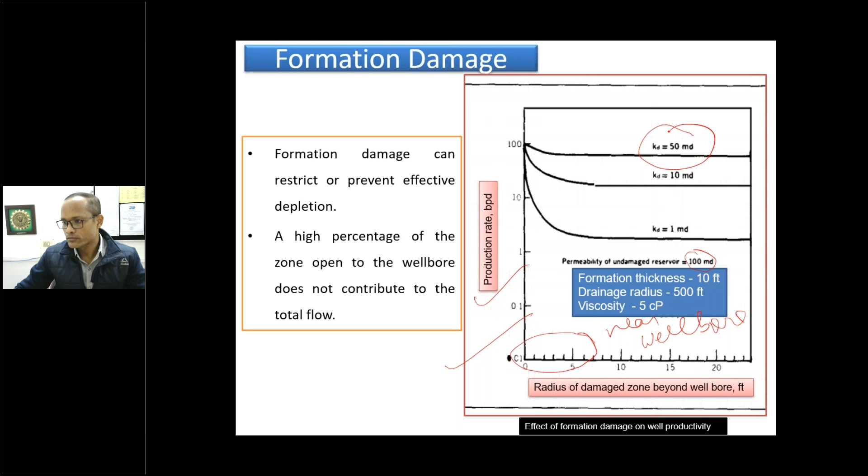Because of this damage zone, the damage permeability - though the formation permeability may be very high - is reduced near the wellbore region because there is damage there, and this damage reduces the permeability. What is permeability? It's the ease of flow, the connectivity between the pores. If you have n number of pores in the formation and these pores are connected, the fluid will flow easily across these pores. If these pores are blocked because of solid invasion or other particle invasion, the connectivity between these pores will be less, so permeability will be less, and that's how production decreases.

In this case, the damage permeability is decreasing. No matter how good the permeability is deep inside the formation, ultimately the fluid has to come up to the well. So if this area is not very clean, you will have a significant reduction in production. That's what formation damage is - it restricts and prevents effective depletion, and blocks the flow of hydrocarbons. Because of that, high reserves may still remain inside the reservoir, even with very good pressure energy inside it. So a high percentage of the zone is not contributing to the total flow, and that's why we are losing flow inside the formation. There are various mechanisms which can lead to formation damage.

Clay swelling is the main and better understood mechanism. Once your well is drilled, you have drilling fluid inside the borehole. You develop a differential pressure in the overbalance condition, mainly with water-based drilling fluid. Because of filtrate invasion, or formation of filter cake, or invasion of mud particles, the near wellbore region gets damaged. If you have swelling clays like montmorillonite or the smectite group, they will swell, reducing the effective permeability.

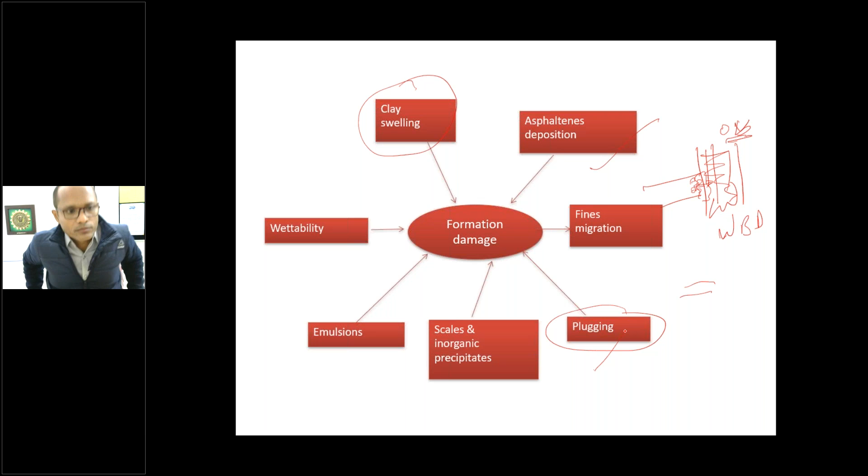Then emulsions - because you're using various additives including surfactants in the drilling fluid, constituting this particular fluid. Because of filtrate invasion and these factors, you may have formation of emulsions or emulsion blocks near the wellbore region or inside the formation.

There's also change in wettability. Since there is filtrate invasion, and during well stimulation jobs you're using acid and pumping various additives along with the acid and solvents, there may be wettability alteration. This wettability change can again lead to formation damage, due to the invasion of other fluids.

Then there is the concept of relative permeability. All these things in detail contribute to formation damage. This is how it's better understood in reservoir engineering - how wettability and these other factors contribute to all these damage mechanisms.

In overbalance condition, we keep the pressure just more than the reservoir pressure, to maintain primary well control and other factors. In that case, once this filtrate is formed, since it's a permeable media, there will be filtrate invasion.

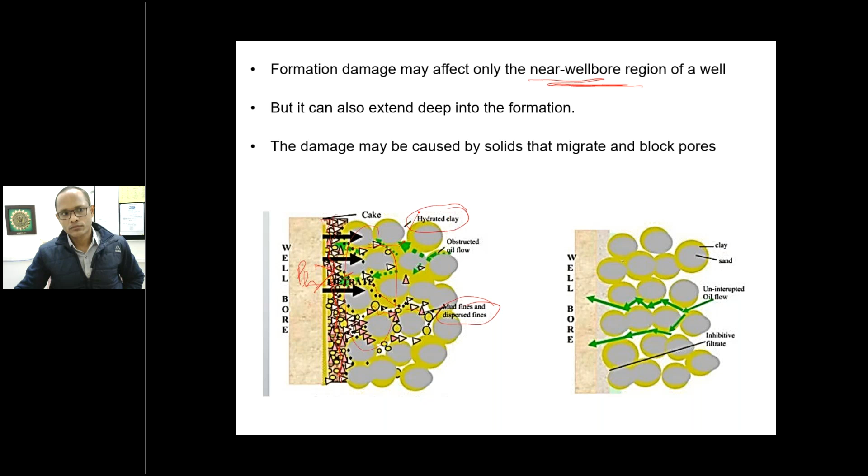You can use simply inhibitive mud, or you can use a particular additive which can give you an external filter cake, or which can give you very less filtrate invasion or less fluid loss. In that case, these pores and all these things will not be blocked. You will have better connectivity, and that's how this particular zone will not have that much significant damage.

Now, damage due to drilling that we have discussed - the blockage of pores, fractures, filtrate invasion, and clay swelling by filtrate. So you can see it has a filter cake, and the cross section of wellbore.

So once it goes inside a highly fractured zone or a zone with high permeability, it can go deep inside the formation, and that's how it will contribute to the plugging of pores. Once the pores are plugged, we lose the connectivity between the pores, and that's how the permeability will again go down.

Now again you can see why are we worried about this damage near the wellbore. See the simple pressure profile here. The static reservoir pressure is not depleting tremendously like this in the beginning. So once it is coming near the wellbore region, because of the skin present, or because of the additional restriction near that region, there is a tremendous drop in pressure because of this skin.

So what is skin? In our reservoir engineering, we define this skin as a numerical value which can give you some idea about the damage inside the formation. So S greater than 0, you have damage. S less than 0, well is improved. S equal to 0, no damage.

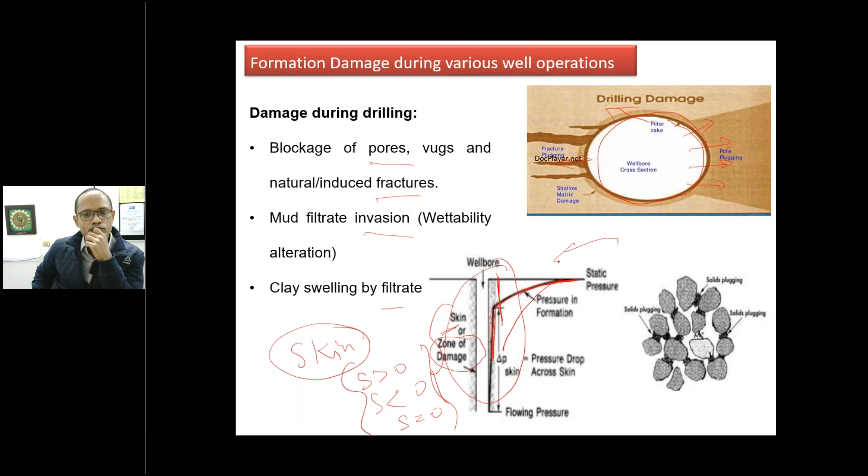Now, there may be damage during casing and cementing also. There may be some filtrate loss from the cement also. There may be plugging by cement and mud solids also while circulating the particular flow.

There may be damage during completion also. Once we are perforating, what we are doing is simply perforating the particular casing and then the cement sheath. So once the perforations are being made, there is a huge amount of debris which is being created, and again if the well is not flowed back very efficiently, this debris or the fines which are being generated may again block the perforations.

Perforation, nothing but holes in the metal. See, once we complete a well, we put a casing - a metal casing. So suppose 9 5/8 production casing we are putting, and we have to cement it. Then once you are done with this drilling, you have to simply produce it. Then for production, you have to put holes - you have to establish pay zone connection with the wellbore.

So to establish this pay zone connection with the wellbore, you have a perforating gun which will be having detonating cord, which will be having charge debris, shape charge, and all these things. That's how once you detonate, it will go and penetrate inside the formation. Then that's how these holes will be created, and finally you will get the connectivity established.

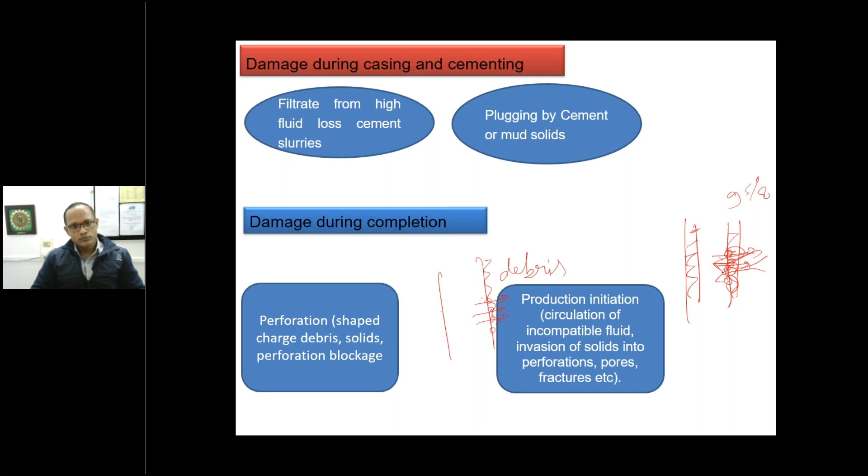So now during production initiation also, you are circulating fluid, and again from this fluid there may be invasion of solids and polymers into the pores and fractures, and that may again contribute to formation damage.

There is damage during the well stimulation job itself also. Though the well stimulation job is targeted towards removing the particular damage, or increasing pore connectivity, or increasing permeability depending upon the formation type and the job desired for a particular well, during that job itself there is also a high chance you may damage the well. For example, you may be doing a fracturing job, or an acidization job.

Since in acidization a huge amount of rock and acid reaction is taking place, you may have a very good amount of fines and debris inside the formations. Once you try to flow back, the additional zone which you have cleared, or the fracture which you have created, may again get plugged by the debris or by the migration of fines. So during well stimulation itself also you may have formation damage.

Then once you are cleaning a well or circulating a fluid, filtrate invasion may take place. If some reactive clays or clay minerals are there, they may again get swelled, and because of this swelling also you may have formation damage.

Then you use proppant to fracture the particular formation, and to keep that fracture open you are using proppants. Again, improper placement of proppant or the migration of fines will lead to reduction in permeability or plugging of the fracture. So in all these situations you may get formation damage from improper well stimulation jobs, or during the well stimulation technique itself.

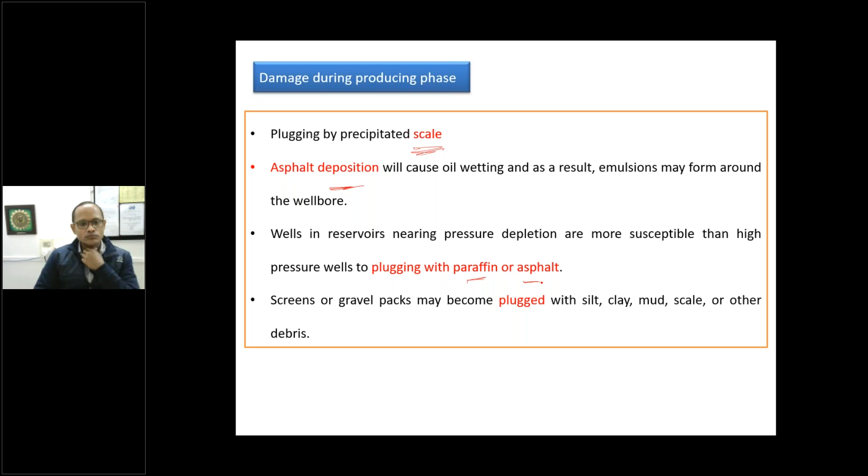Again, during production you have screens or gravel packs which are installed. Gravel packs, why do we use these? Few formations don't have much cementation strength, so these sand grains, when they are not tightly held up or tightly bound, are unconsolidated.

So once you start taking production, because of the drag forces and pressure disturbances, or because of changes in mineralogy and other things, this loosely bound sand will try to get into the wellbore and come up with it. This sand is not desired at all, because it will erode your equipment.

So just to prevent this, we use sand control technique. Gravel packing is one such technique where you use coarser grains sitting near the particular zone, which allow the flow of hydrocarbon but not the flow of sand and smaller grains. Initially they have very high permeability, but slowly, as production takes place and there is movement of silt, clay, mud, or scale, they may again get plugged, and you have to look for some removal technique.

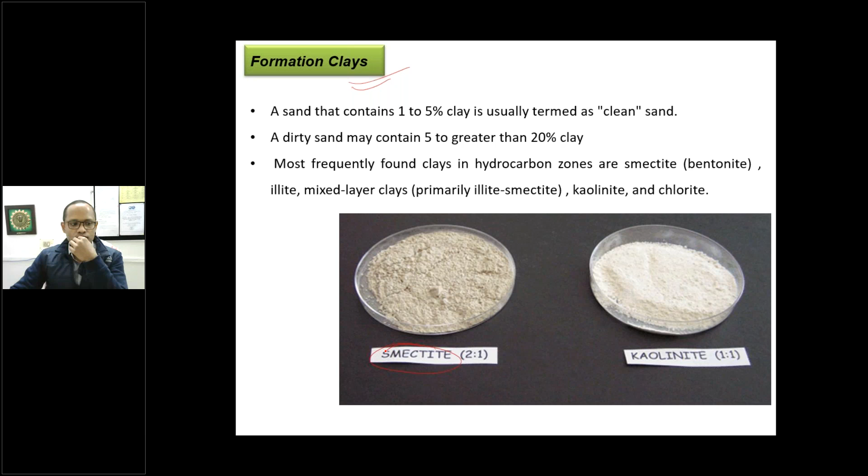Now, these clays are very troublesome, because the reactive clay, mainly smectite, the moment it interacts with water... and what is the source of water for us? The drilling fluid that we are using, or the completion fluid, or during workover, the workover fluid. So if you are using water-based fluids, rock-fluid interaction may take place, and because of this, when this clay comes in contact with water, it may swell. When the swelling takes place, that will significantly contribute to formation damage.

Not all types of clays are problematic for us. The clays having swelling potential, with high cation exchange capacity, can exchange ions present in the water or fluid, leading to migration, swelling, and disintegration. A sand containing 1 to 5% clay is not a problem - generally known as clean sand. A dirty sand or sandstone having clay percent around 20%, or in between 5 to 20%, may have some clay minerals which may create a problem for us, leading to formation damage. So as I said, all clays are not a problem for us.

So just by simply seeing the clay percentage, that okay, clay is 20 or 25%, it will create a problem once we use water-based drilling fluid, or once we have rock fluid interaction - this is not the right statement to say, because unless you identify in this 20% what are the clay minerals, the types of clay minerals, then you can say if this particular clay mineral is there, or other clay mineral which has high magnitude rock fluid interaction, then it may create a problem during drilling or during this particular well operation.

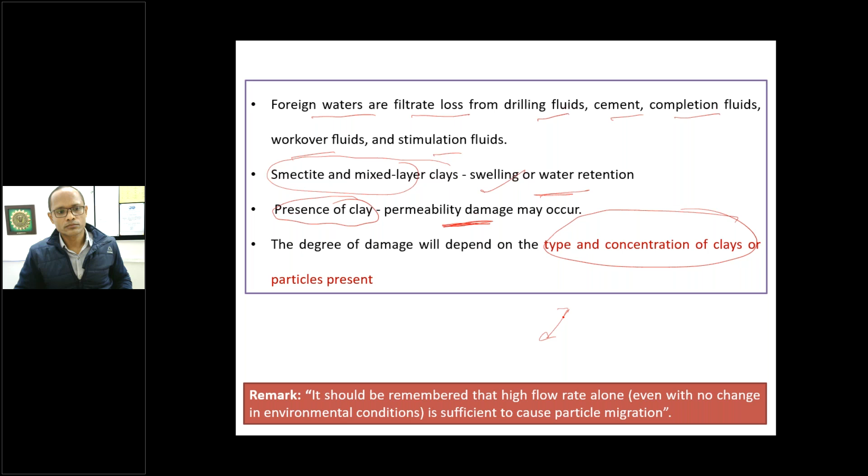I read somewhere that during production itself, when there is no interaction between the rock and fluid, or no particular damage done during production, when you have very high flow rate alone with no change in environment condition, this will cause particle migration. So when this particle migration is taking place, they may go to a particular high permeability zone, or start getting accumulated there, and that's how they lead to a reduction of pore connectivity.

Now, these damage types have been categorized into mechanical, chemical, thermal, and biological. Depending upon the operation, suppose we are injecting fluid from the surface or doing some injection job, that fluid may have some bacteria or something like this. This bacteria may go inside the formation, and that's how it may lead to absorption or precipitation, or something of this sort. Then that may cause biological damage.

In thermal damage, when we are doing steam injection jobs, or in-situ combustion jobs, at high temperature there may be mineral transformation taking place, and there may be generation of gases like hydrogen sulfide and others. These gases may create trouble for us and lead to formation damage.

In chemical damage, there will be interaction between rock and fluid, and because of clay swelling and similar effects, you will have formation damage. In mechanical damage, the migration of fines and similar issues, or simply when you have an open hole and you're using a drill bit or tool which is directly creating trouble or interacting with the particular sensitive pay zone, that may again cause mechanical damage.

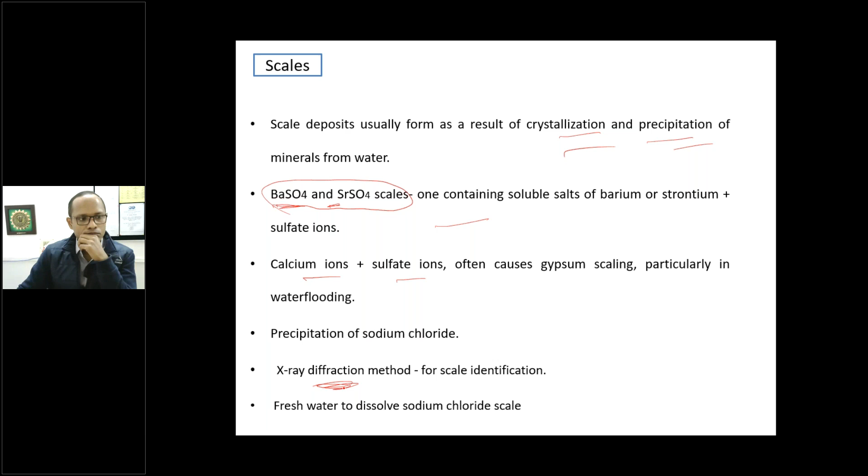Now we can identify scales using XRD. This technique lets you identify the scale by getting characteristic peaks. If you have some kind of scale, you can utilize different solvents, say water, or acid salts, to dissolve it. So this is just a summary.

If you have sodium chloride, you can use a water soluble scale treatment. If you have calcium carbonate or iron carbonate scales, you can use acids to dissolve these. Some scales are neither water soluble nor acid soluble, so you have to use intermediate compounds, or you can use commercially available solvents or additives from service companies. They will form an intermediate component, which will then be dissolved with acids.

Once these scales are inside the formation, blocking the pores or reducing pore connectivity, you have to dissolve the scale depending upon its type. You can use water to dissolve a water soluble scale, and acid to dissolve an acid soluble scale.

Now, how do we identify or diagnose the damage? Using well test analysis or pressure transient analysis, you get various plots. Utilizing that, you can get the value of skin factor S, and check whether S is negative, positive, or zero. In that way, you can check whether the skin factor suggests going for a well stimulation job.

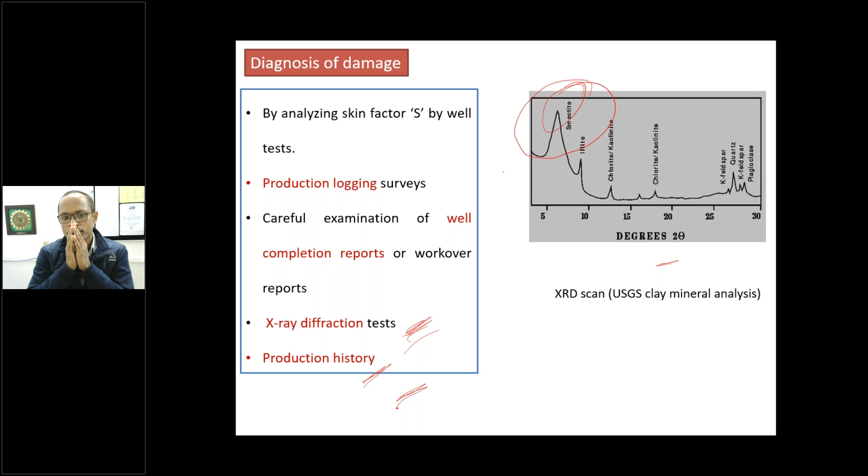And in that case also, some damage has been done, and accordingly you can plan for a well stimulation job. Now coming to stimulation, generally production happens naturally because of the compressibility of fluids, their mobility, and connectivity between the pores.

We call that ease to flow, which is connectivity between the pores, i.e., the permeability. If the formation has low permeability, or is damaged, it will not contribute to the desired or economic flow rate, and you have to choose a well stimulation technique. It is not always the case that there is damage requiring stimulation. There are formations which have inherent very low permeability, like shale.

In case of shale gas, they have very low permeability, sometimes in nano darcy, sometimes as low as 0.1 millidarcy. In that case, even though you have not done any damage during surface operations or various other operations discussed previously, you still intend to fracture that zone, or try to establish or increase the permeability and connectivity in the pores, because that formation may not give you the desired economic production rate. So we try to stimulate even non-damaged formations which have very low permeability or pore connectivity.

So we can say stimulation jobs are targeted towards improving pore connectivity, mainly in low permeability rocks or reservoirs, and they can also help in removing damage that has been done. Simultaneously, they can increase the permeability inside the formation for low permeability rocks, and they can also increase the effective wellbore radius.

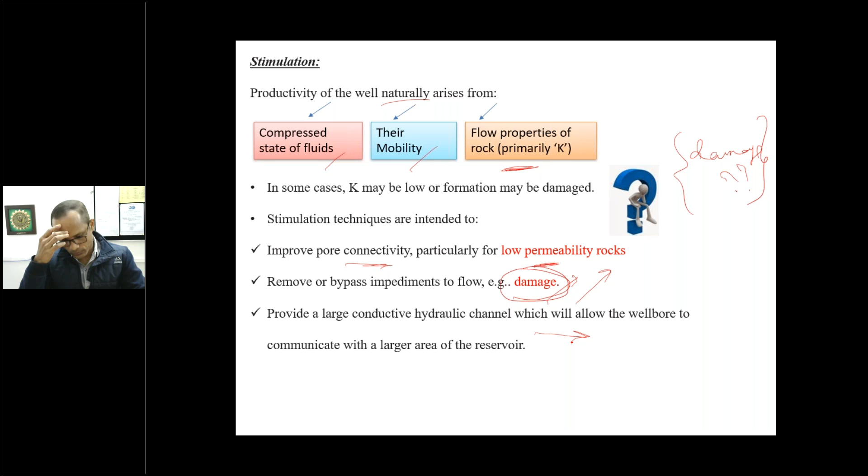You can have better connectivity between the wellbore and the formation by having more hydraulic fracturing or the hydraulic channel. That's how to establish better connectivity. Now the stimulation techniques are categorized.

We have acidizing. Depending upon the flow rate and pressure, you can have matrix acidizing as well as fracture acidizing. It depends on what kind of pressure you are using. If you intend to fracture or break a particular formation, you have to inject at a flow rate or pressure more than the fracture pressure.

Suppose for a particular formation the fracture pressure is 4500 psi, then you have to inject the fluid from the surface such that the pressure is more than this value. That's how the formation will break down. Once you break down the formation, the particular fluid—whether acid or proppant or whatever you are planning to put inside the fracture—that job is done.

Normally in matrix acidizing, we are not intending to fracture the formation. We simply try to inject below the fracture pressure, so placement of acid happens inside the formation or the zone you are targeting. Since the injection pressure or rate is different, the objective is different. In matrix acidizing, we are looking to remove near wellbore damage or skin damage, or to change the permeability or connectivity near the wellbore, maybe a few feet from the wellbore.

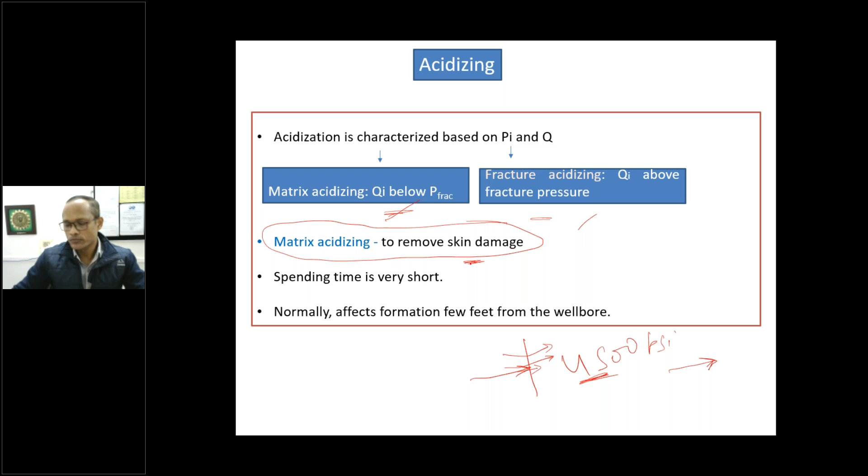Since the reaction is involved between the rock and acid, depending on the acid strength or reaction rate, the spending time may be very short. Even within 1 or 2 feet, the acid may be completely spent, so the near wellbore region affected may be only a few feet. That's why acids have high reaction rates, and you can use retarders or additives to increase the spending time so the acid can go deeper inside the formation. That's how the acidizing job is targeted toward a few feet from the wellbore.

In fracture acidizing, like in hydraulic fracturing, we are simply fracturing the formation and going deep inside it. The objective is to create linear flow channels inside the formation. So this fracture acidizing is an alternative to hydraulic fracturing and propping.

In carbonate reservoirs, once we fracture a particular formation, we will have acid there. This acid will go inside the created fracture, and since there is heterogeneity in the carbonate formation, some etching will occur. So etched, non-uniform fractures will be created, and once you release the overburden pressure, they will not close completely, so fluid can flow easily through these created fractures.

In hydraulic fracturing, we have to put proppant. Here, once the overburden pressure is applied, these fractures will not be closed completely, and that's how you will have the fracture conductivity established.

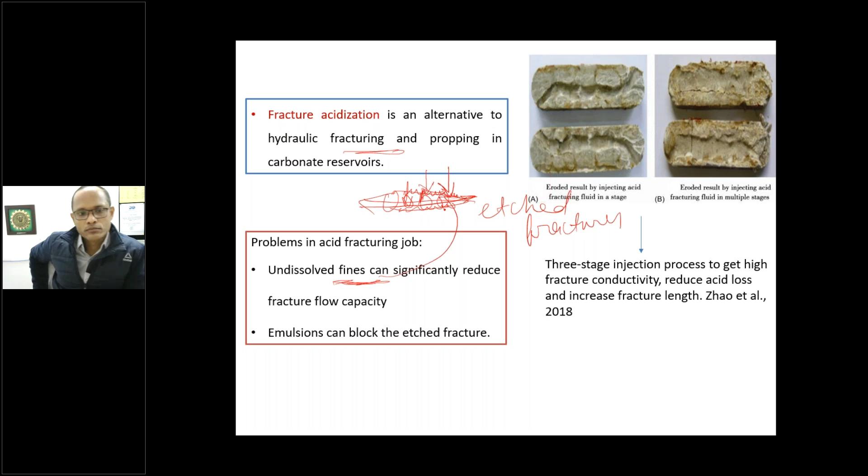Now the problems in the fracturing job: you have a huge amount of undissolved fines. This fines migration may take place, and they will settle inside the created fractures, causing plugging again. We are also using some additives, so there may be chances of emulsion formation with the formation fluid and other things, causing some blockage inside the formation.

Now this is one image showing multiple stages of injection. We will have better fracture length or reduced acid loss inside the formation. So this is one step, and this is three-stage injection. They have given images of four samples, and suggested that in these cases there is more dissolution, so better connectivity is established in these multiple stages.

Now various types of acids that we can use: HCl, HF, acetic acid. Depending upon their acid strength and ionization power, these acids are categorized. For HCl, they generally target the carbonates - they will dissolve carbonates, chalk, dolomite.

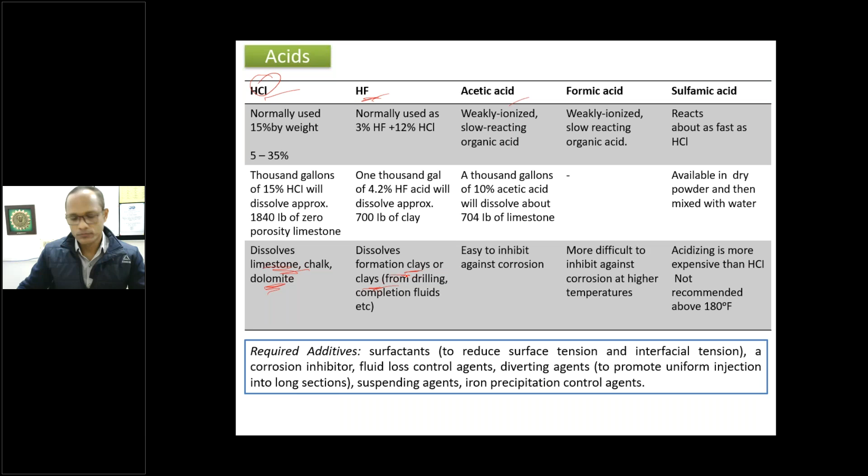HF will generally target the clays - natural clays, or clay additives which have been injected from the wellbore, maybe in drilling fluid. So it can dissolve that particular thing and remove the damage. Acetic acid is easy to inhibit against corrosion. Sulfamic acid is available in powder form, so you can simply transport and bring it to the rig site, dissolve it in water, and then inject it. But it is more expensive than HCl, and it has some temperature limitations also.

In addition to these acids, you require additives also in the acidization job. You can use surfactants to change interfacial tension and surface tension. You have to use corrosion inhibitor because you are injecting from the surface, and the tubulars are in contact with this acid, so you have to inhibit them from being corroded. You also have to use fluid loss control additives, some polymers, so that there will not be significant loss inside the formation. Then you can use diverting agents.

Generally, what happens is the acid will follow the path of least resistance. So a zone with relatively more permeability than the adjacent zone will get most of the acid, and as that zone dissolves, its permeability increases further. So the zones with least permeability will not get a good amount of acid. But we are mainly targeting our low permeability zones, and because of this, the acid is not going to the low permeability zone, or it is not being uniformly injected into the long section.

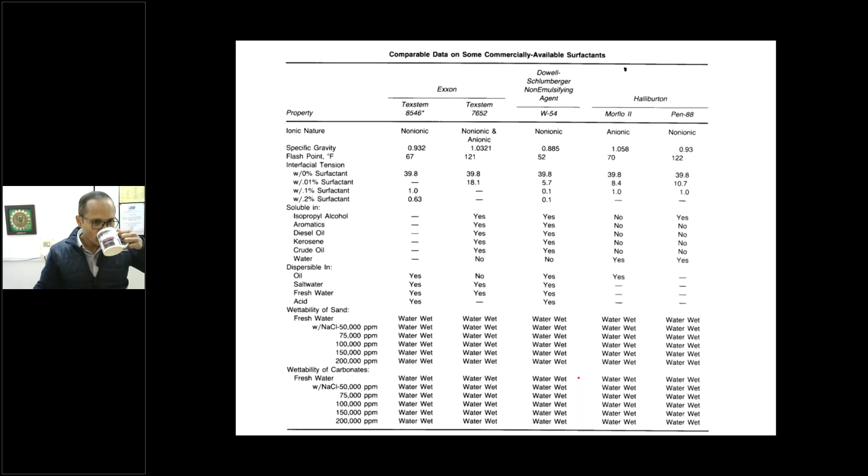You can also use iron precipitation agents and suspending agents just to get the job done efficiently. The various surfactants available under commercial names give certain properties, and based on the particular job, you can choose the particular surfactant - nonionic, anionic, or a combination of nonionic and anionic. This depends on whether they are water wet or oil wet, their solubility, whether they are dispersible in oil, or their salt tolerance, salinity tolerance. All these properties are given, and accordingly one can choose and get the job done.

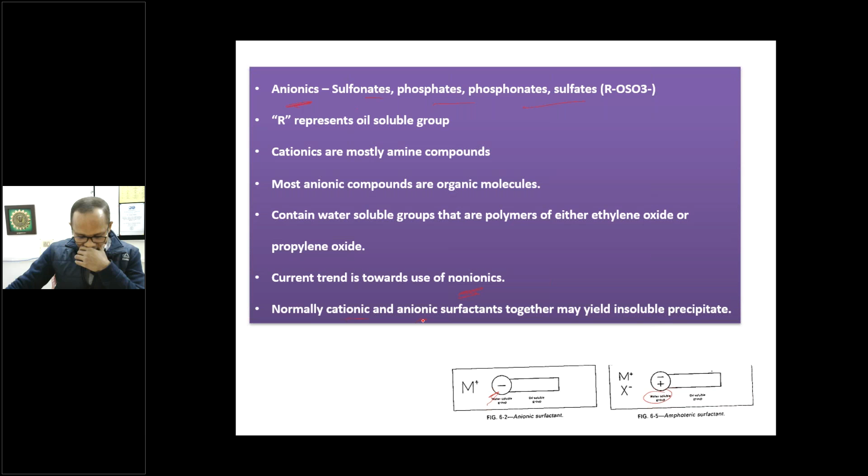Now, once the surfactant has sulfonates, phosphates, and phosphonates, having these, it can be categorized as anionic. Anionic surfactants are a water soluble group. Amphoteric is also water soluble, both negative and positive. Cationics are mostly amine compounds, and these ionic compounds are organic molecules, in contrast to nonionic. Normally cationic and anionic are not used together, because that may yield some insoluble precipitate, which would again be a problem. So depending upon what kind of surfactant you require and the properties needed, you can choose the particular surfactant.

Now, carbonate acidizing. Once we talk about acidizing, we have different formations - in carbonates we have dolomites and limestone, and another formation is sandstone. In carbonate acidizing, the objective is to clear near wellbore damage and also create linear flow channels by fracturing and etching. Here we remove the near wellbore damage, or we intentionally create linear flow channels, establishing connectivity between natural fractures present there, or establishing connectivity between the pores by fracturing - you can have fracturing, or acid fracturing.

Now, the major problem with acid is that it tends to react very fast with carbonate. It will spend near the wellbore, that's why you will not get deeper penetration inside the formation. The problem with homogeneous carbonate is that it will generate smooth fractures. We have overburden pressure - suppose we are fracturing at say 6,000 feet, this overburdening strata will have some overburden pressure on the created fracture. So once you remove the treatment pressure or injection pressure, the created fracture may get closed again because of this overburden pressure.

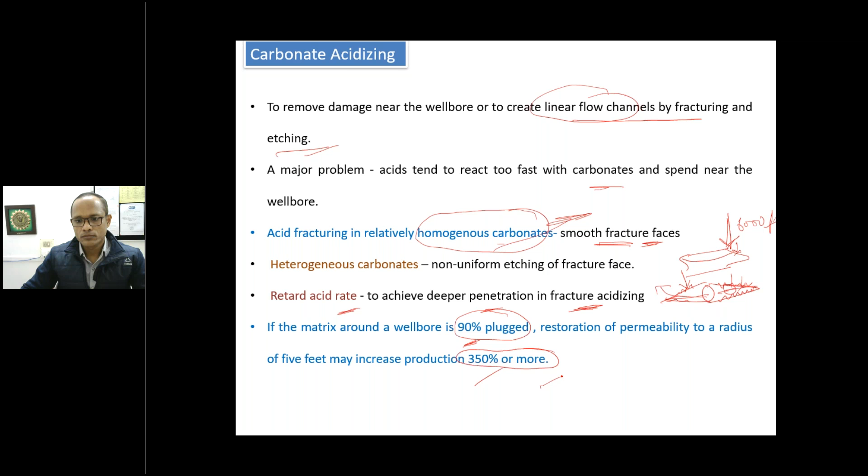So if your wellbore is plugged 90% near the wellbore, and you restore the permeability for say 5 or 6 feet, then you can have an increase in production around 350% or more - that is the significance of removing formation damage. That's how, if we do the job effectively, there is a significant increase in production, provided the formation has better permeability and the damage is near wellbore damage. In that case, by simply removing the formation damage near the wellbore, we may have a good amount of increment or production hike once the damage is removed.

In the case of homogeneous formations, it is very difficult to get a particular non-uniform fracture. So you can have a viscous preflush before the main stage, some viscous gel or viscous polymer gel inside the homogeneous formation. Once the acid arrives, because of this viscous gel being present, acid will be diverted into different portions. So in that case also you can have etching by acid channeling, irregular etching, and you may get this non-uniform fracture.

So in acid fracturing we go above fracture pressure, and here we have conductive wormholes. Because of carbonate having different properties, the pore size or vugs and fractures will not be of uniform size. We may have big pores, small pores, and all these things. So the pore which is having a bigger size, the acid will try to go there, and this particular pore will further grow more and receive more acid. That's how these wormholes are being created in carbonate acidization, or normally acid fracturing in the carbonates.

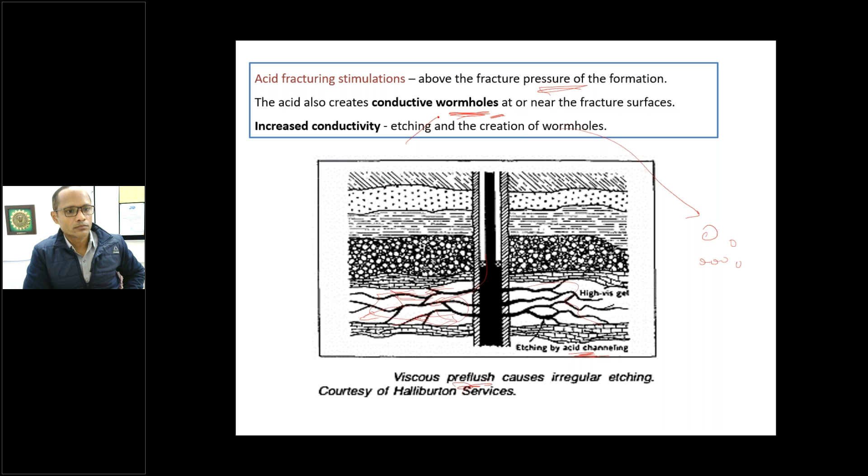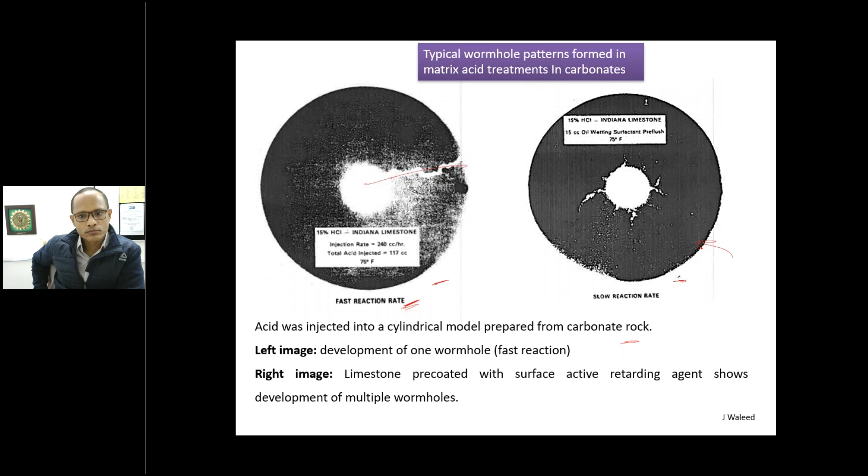This is one core flow study. This is the typical wormhole pattern found in matrix acid treatments in carbonates. Acid was injected into a cylindrical core prepared from the carbonate rock or representative rock. When the reaction rate is very high, very fast, you can have simply one wormhole extending. When you have something which can retard the acid reaction rate, or slow it down, by involving some surface-active retarding agent, you can have multiple wormholes inside the formation. So depending on the flow rates, the generation of wormholes changes. Even though we are using the same type of acid, same concentration, same additives, because of the acid reaction rate and change in mineralogical composition, the job may give different results.

Typically, once we fracture a carbonate rock, once you pump the acid inside the fracture, the acid will etch the fracture faces. What happens then? You will have conductive wormholes, or rough, non-uniform fracture faces, and that's how fracturing is done inside the carbonate.

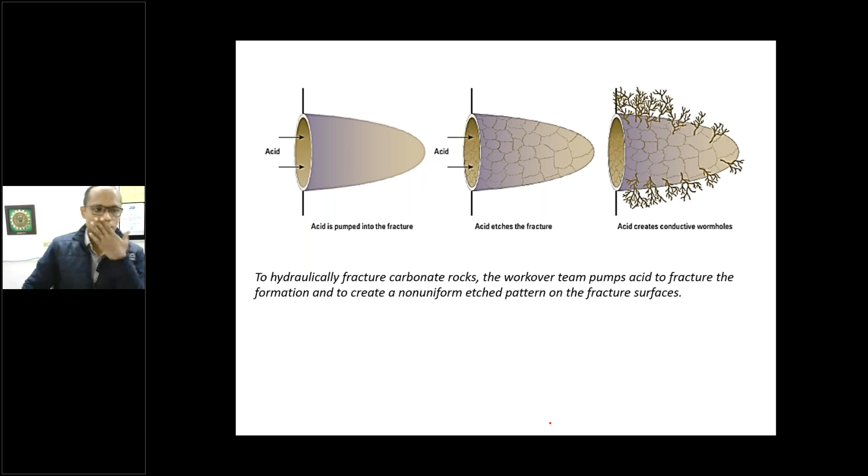Now, acidizing in sandstone. The target is to increase permeability by dissolving clays near the wellbore. These clays can be natural clays which are there inside the formation, or they can be clays injected from the drilling fluid, or solids which have migrated from the drilling fluid inside the formation.

If you have a sandstone with 20% or more carbonate, you can use HCl only. HF acid can target carbonate, calcium carbonate, sand, shale, feldspar, and clay. But with calcium carbonate, hydrofluoric acid will generate an insoluble precipitate, and this insoluble precipitate will again be a problem for us - that is known as calcium fluoride.

Once you have calcium carbonate, it is better to use some pre-flush so that this calcium carbonate can be dissolved. Once you are using 3% HF in the main stage, this will not lead to precipitation of fluoride ions or calcium fluoride. Generally, in typical mud acid, we use 3% HF and 12% HCl in the main stage. Before that, we have a pre-flush stage, and after that, a post-flush stage.

So HF acid may react with limestone, that is calcium carbonate, and it may lead to calcium fluoride, which is an insoluble precipitate. So avoid this. You can use a pre-flush of HCl, because this will dissolve the carbonate and give you CaCl2. That's how it can be done. Or you can simply use NH4Cl as the pre-flush, or after.

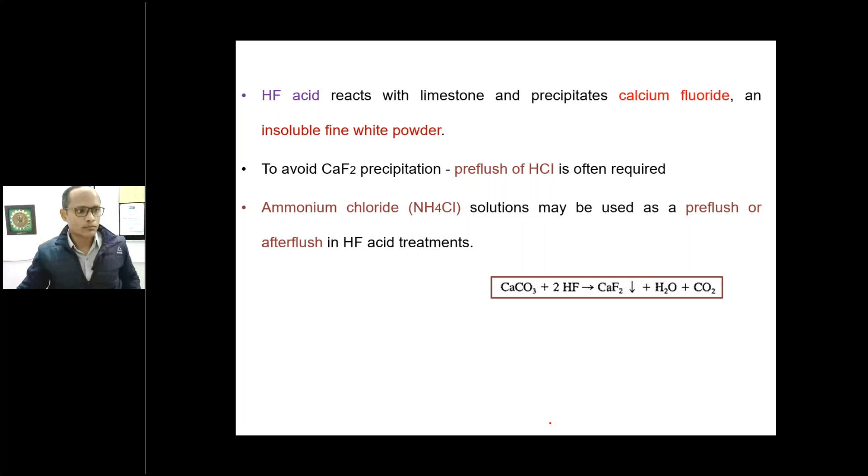In the absence of carbonates, we don't require HCl and all this. You can normally use diesel oil, kerosene, crude oil, or ammonium chloride as pre-flush, at about 5 to 15%. Add additives, surfactant, corrosion inhibitors, mutual solvent. Mutual solvent is used because it will prevent the adsorption of these corrosion inhibitors or surfactants on the rock surface or the sand face, the sand grains.

In an HF-HCl acid treatment job, you can have 3% HF, 12% HCl. After that, you can give after-flush just to displace the spent acid, or just to get the job done efficiently. If some unspent or spent acid is there, or some additives, you can push them deep inside the formation, or you can also prevent the precipitation of ions or the formation of emulsion. All these things you can do with the after-flush, and that's how you can have your main job done.

Normal field procedure: first choose the well which has a positive skin factor. You can utilize pressure transient analysis, well test analysis, build up and draw down - all these techniques you can use to calculate the skin factor. If the skin is positive, or the well is damaged, you choose that particular well and use 5 to 15% HCl pre-flush. This pre-flush is required so that we can avoid the precipitation of some ions, like iron ions, and make the environment suitable for the main stage job.

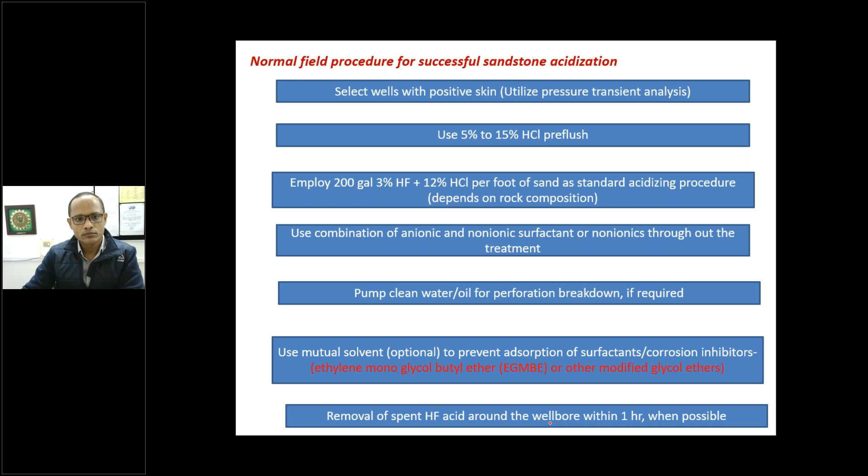Then why are we using mutual solvents? You can use modified glycol ethers, which will prevent the adsorption of surfactants and corrosion inhibitors on the rock surface, so it will not further lead to formation damage. Then, when the acid job has been done, the spent HF acid near the wellbore can be flowed back, and you can have the flow established there whenever possible.

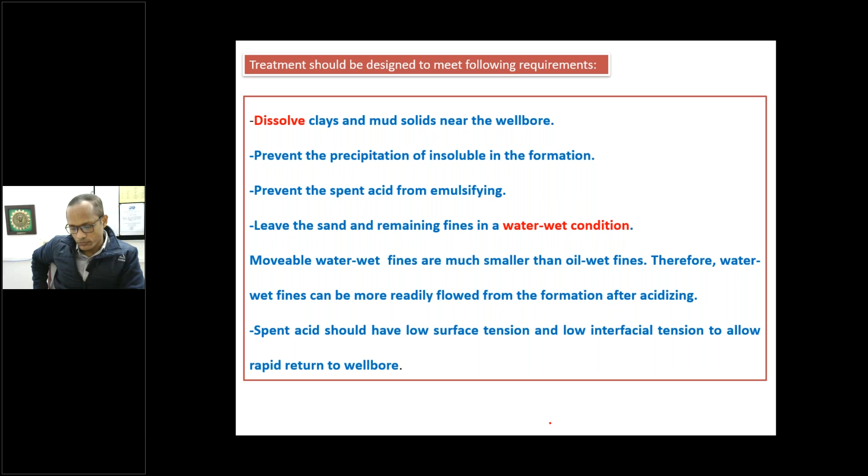Now we can summarize what our treatment job is intended for. It can dissolve clays, mud solids near the wellbore. After the job is done, there should not be precipitation of any insoluble compound, which will further lead to damage, because our intention is to clear the damage. But because of the presence of various ions or the change in concentration of the system, it should not precipitate. So the precipitation of insoluble substances should be prevented, or you can use some additive just to minimize this particular issue.

You can prevent this spent acid from emulsifying. It should not be mixing with the formation fluid and making an emulsion there. So we can use surfactant or additive which can prevent this particular thing from taking place.

Now we will leave the sand or the remaining fines after the job in water wet condition. It is mentioned that these water wet fines are much smaller in size compared to oil wet fines, so they can more readily flow back, or have more mobility, back to the wellbore after acidizing. So later, once we have production or movement of hydrocarbons, this will not cause trouble by blocking the pores and other things. That's why they have said it has to be in water wet condition.

Spent acid should have low surface tension, low interfacial tension, such that when we are trying to flow it back once the job is done, it should return very quickly to the wellbore.

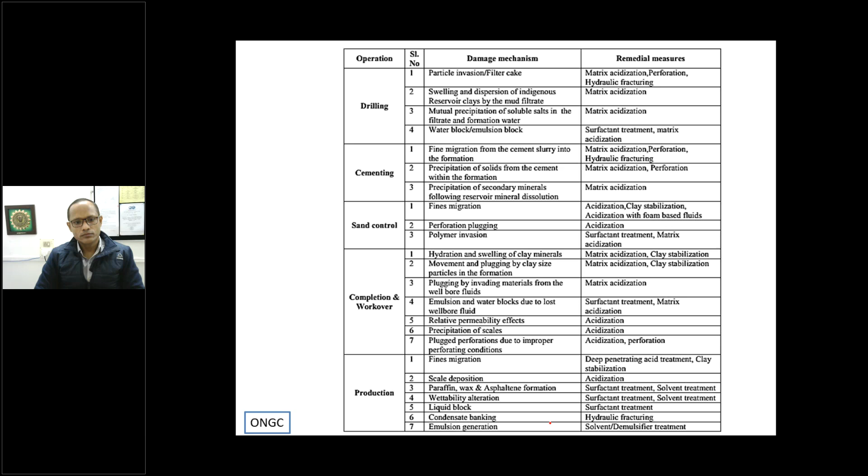Since acid is involved, we must also take care of safety, because the concentration of acids or inhalation may cause respiratory problems in humans - the vapors of the acid and anhydride are very irritating and problematic. If acid accidentally touches the surface or the skin, it may cause severe burns. So special care should be taken while transporting these acids or chemicals, and they should not contaminate your clothes, otherwise it will be a problem. If accidentally contacted, use soap and water immediately so the extent of damage or burn is minimized.

Now, hydraulic fracturing - how it works. It is intended to increase the permeability of a particular formation. A huge amount of water, million barrels, is required, along with some additives and polymers just to have the viscosity - we can use guar gum there. That's how this particular viscous fluid is pumped inside the formation.

There are two stages - the pad stage and the slurry stage. In the pad stage, we simply inject water with some chemicals, additives and polymers, which go inside the formation and fracture or break the rock. In the slurry stage, we inject sand and proppant, which go inside the formation, and once we remove the treatment pressure and the pumps are in certain condition, that fracture will not get closed completely because of the presence of the proppant.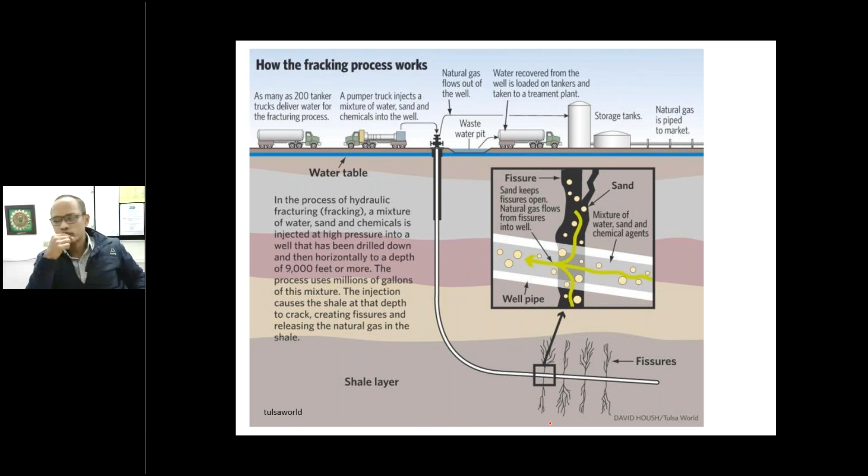So the selection of proppant and the placement of proppant play a crucial role, because they will affect the fracture conductivity. Typically this fracturing profile will be like - you will have a first breakdown pressure where the fracture initiation takes place and the formation is just breaking. After this, you have another stage, fracture propagation, where the propagation of the fracture takes place, and finally you will have an instantaneous shut-in pressure, meaning the pressure required to keep the fracture open. So typically you will have this particular profile once you are going for this hydraulic fracturing job.

Now, the critical part is how to choose a particular fluid. Since we are injecting proppant inside the formation - that may be sand, bauxite or other ceramics - it should have very good transporting property. Viscosity should be good enough. It should have good suspension capability, because the fluid will be going deep inside the formation and will be subjected to various shear rates inside the formation.

Commonly used are sand and bauxite. Sand can be used for all types of reservoirs and is relatively less expensive than bauxite. It should not contain more than 5% fines.

Sintered bauxite is the highest strength proppant. So the designed fluid should have more viscosity, because it has more density as compared to sand.

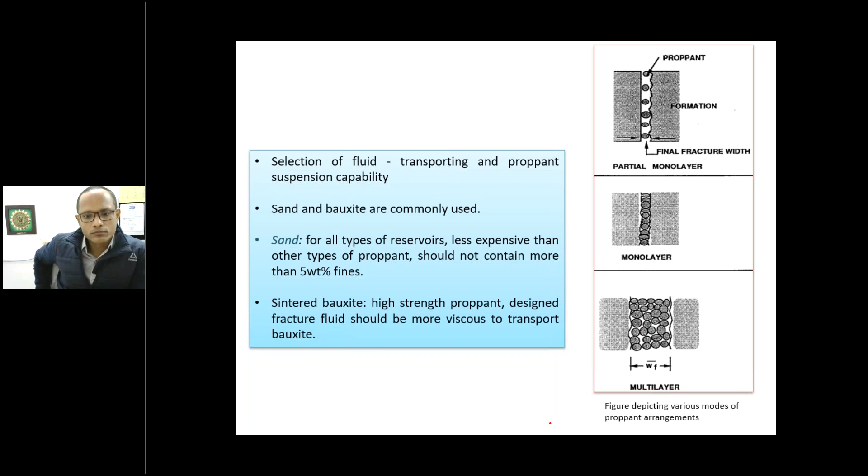Once you remove the treatment pressure, because of the overburden pressure, these proppants help maintain the fracture open. Their compressive strength plays a significant role, because once the treatment pressure is released, the proppant should not get crushed. Otherwise it will cause low fracture conductivity, and the job will not be as efficient. These are the images of various proppants and their types.

Now let's look at one or two case studies to see what research is going on, or research that has been done so far. Here they have used one organophosphonic acid complex having 5 hydrogen ions, something related to chemistry fundamentals, and they developed these acid systems.

So RHF is the regular hydrogen chloride, hydrogen fluoride acid system, and IHF is the improved hydrogen chloride, hydrogen fluoride acid system. They developed different acid systems: acid A, acid B, acid C, acid D, varying the composition of HF, HCl, and acetic acid. HV is the organophosphonic acid complex.

As discussed previously, smectite has some swelling potential and may lead to significant formation damage. Based on this mineral characterization, they went for core flow testing.

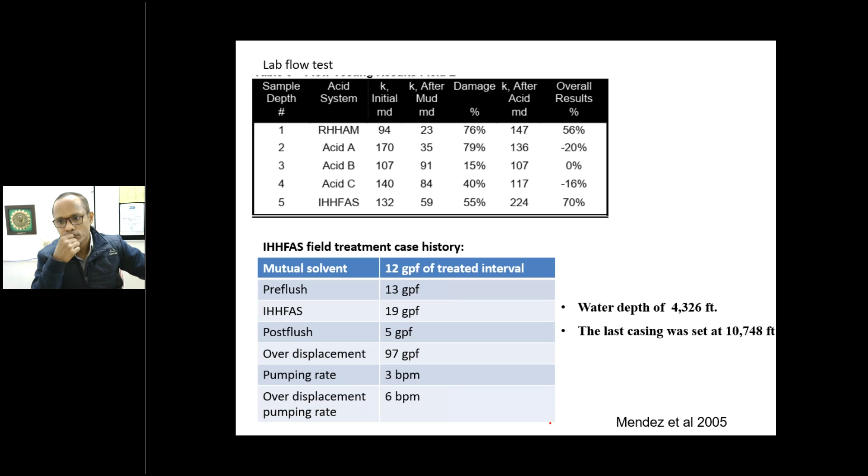In self-propping fracturing technology, as discussed in conventional fracturing, we simply use proppant such as sand or bauxite and other ceramics to keep the fracture open, so it will not close because of overburden pressure or stresses inside the formation.

There has been a recent development in self-propping fracturing technology. In this, we are not using any proppant or similar material. What happens is we have a two fluid system.

One is CFL, that is channelized fracturing fluid, which will create fracture inside the formation, and another is self-propping fracturing fluid, that is SPFL. When these two go inside the formation, there is a phase change because this SPFL is sensitive to temperature. So when there is a change in temperature, this solid free liquid will turn into self-propping solids, or SPS. When it goes inside the formation, and there is elevated temperature, it will undergo a phase change and turn into solid particles. These particles will keep your fracture open.

From surface, we are simply injecting fluids only. In this particular technology, we are not injecting any proppant or something. Because of the chemical property and the chemistry involved in this operation, there will be a change in phase, and the solid particles, or SPS, will form in situ inside the formation. They mentioned it takes around 5 hours for this to take place, but with the help of some additives, or phase change temperature additives, this can be reduced to 30 minutes, depending upon the job required at the particular well.

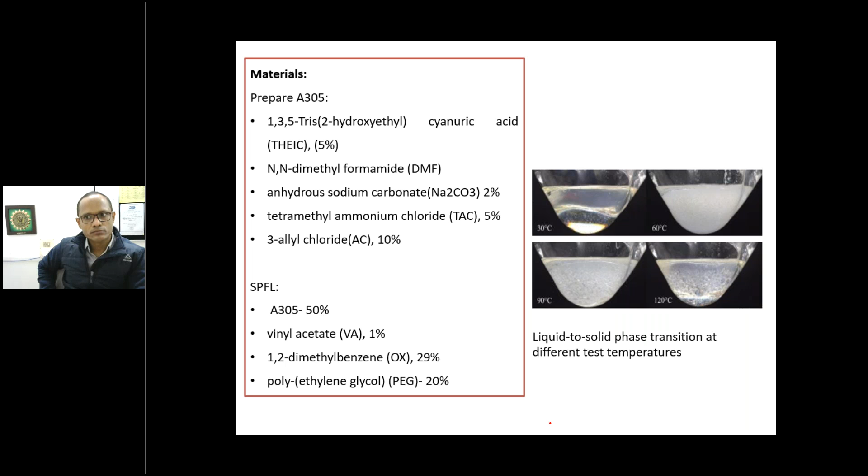This is there because from surface what we are injecting is at surface temperature. But when it is going deep inside the formation, the temperature will be changing. Because of that, this particular thing is being utilized here, and because of the change in temperature, this phase change is taking place, and the development of SPS is taking place.

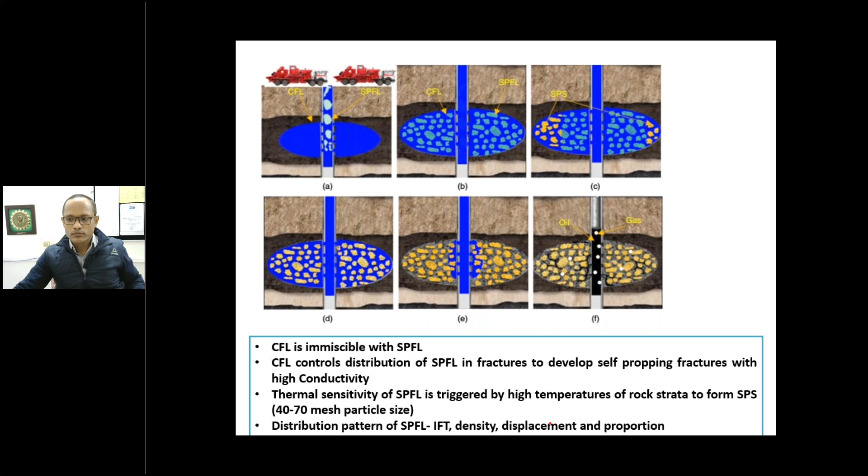You can see in image A they are injecting CFL and SPFL, and this may be the morphological distribution of this SPFL inside the particular zone. Then, because of the change in temperature, because of the thermal sensitivity of this SPFL at formation, these particular solid particles are being developed. In image D, it is the further distribution of this SPS.

Then what we are doing, this CFL is now being flowed back up to the surface, and because the fractures are still being opened due to the presence of SPS, this conductivity is retained. That's how oil and gas will flow through this SPS. That's how this is all being summarized here.

CFL and SPFL, they claim, are immiscible. The CFL controls the distribution of SPFL in the fractures, to develop self-propping fractures. Thermal sensitivity of this particular SPFL is just triggering this formation of SPS. The particle size is around 40 to 70 mesh in this particular job.

They have used two systems: slick water, and a guar gum based system. This particle size varied a little, but I think it is below 100 only. This distribution of particle size was there, and they claim it can be further improved. SPFL improvement, the distribution can again be controlled by simply varying some parameters like interfacial tension, density, displacement, and proportion—the amount of concentration that we are using. Based on that, this distribution of SPS can again be controlled. That's how it has been mentioned in that particular research.

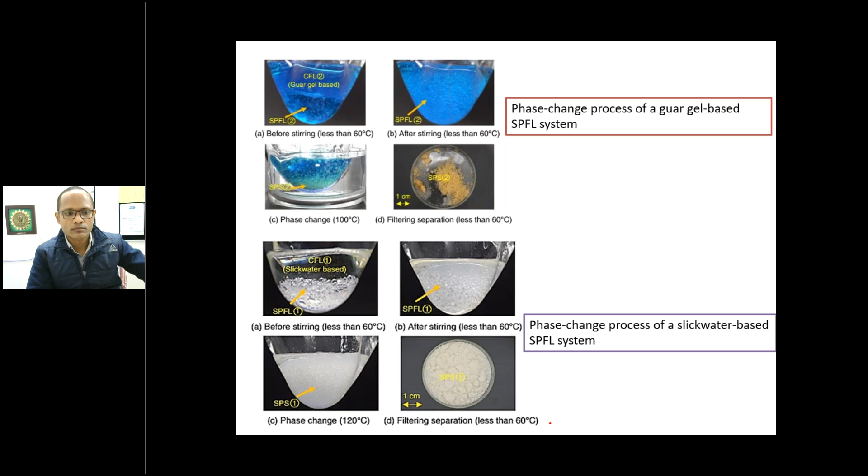Now one more image, for guar gel based CFL, you can see before stirring at 60 degree, after stirring at 60 degree, and at 100 degrees Celsius, there is a phase change, and finally for filtration and separation there will be some solid particles like this. For slick water, you will have the change in temperature, and because of that change, again it is yielding solid, shown in image D at the bottom. So you can have this SPS generation here.

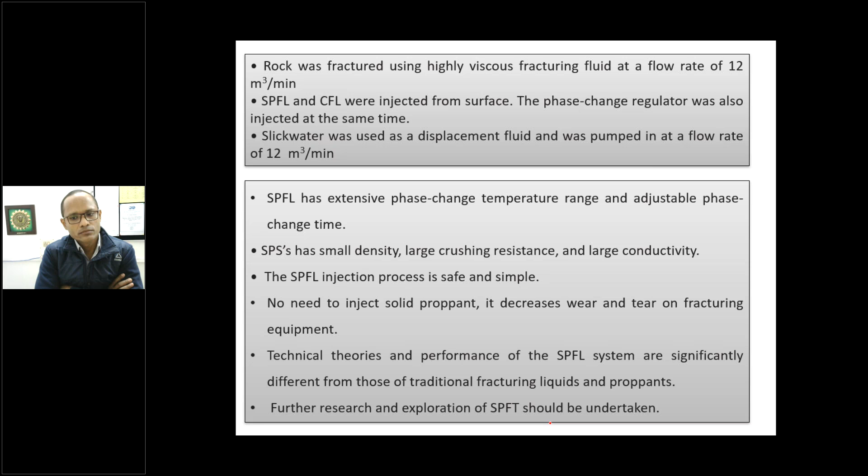So further research and investigation is required to explore the complete effect of this SPFL and self-propping fracturing technology. People can try to explore further how it can be done more efficiently, and what are the other factors controlling this particular thing.

So at IIT we have these facilities which can contribute to this particular research. We have core flood, core holders, liquid permeameter, gas permeameter, which can simulate the actual wellbore condition. We can go up to 6,000, 7,000 overburden pressure. We have a syringe pump, which can give constant pressure injection, fluid injection mode up to certain psi.

We have a surface tension or contact angle measurement device, which can measure the surface tension of the fluid, maybe acid or fracturing fluid which we are using. And we have this acid resistant core holder, or the fluid accumulator also, which can help in pumping acids, since the material is acid resistant.

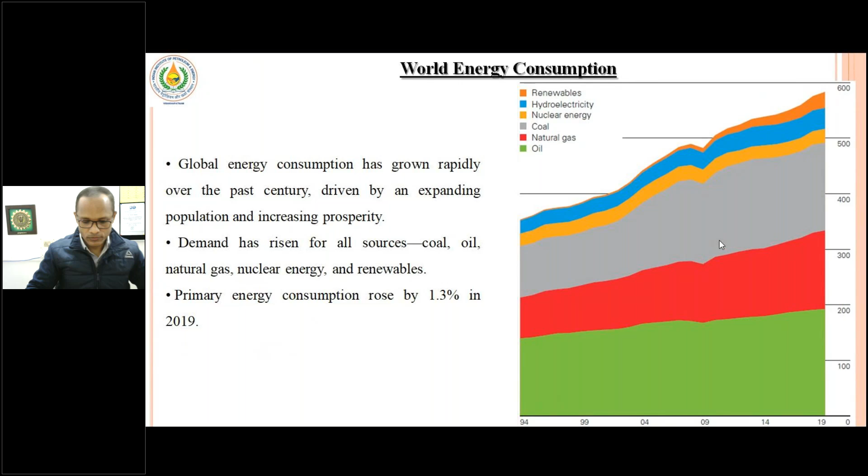If we look at figures published by British Petroleum in their annual review, we can see that among all these energy sources, oil, followed by coal and natural gas, provides the bulk amount of energy we require. Among these, looking at the share of global markets of different energies, oil continues to hold the largest share of around 33%, followed by coal at 27%.

This is the data from 2019, last year, where we can see there is a dip in coal consumption. This is because coal is actually a very dirty energy source - when you burn coal, the combustion releases a much higher amount of greenhouse gas to the atmosphere compared to natural gas or oil. So now countries around the world are planning to decrease coal consumption, especially in industrial applications, and that's why we see a dip in coal consumption in the recent last 5 years. We can also see an increase in natural gas consumption.

Hydroelectricity, nuclear, and renewables are still at an initial stage. We require more efficiency from those fuels.

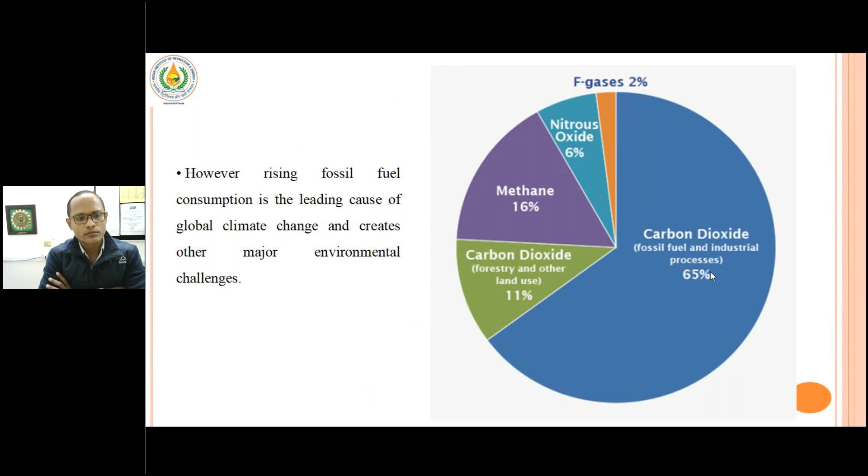So natural gas is cleaner compared to coal and crude hydrocarbons. The source of natural gas is mainly, as you know, from conventional reserves. Conventional means sandstone reserves. We can also produce from shale gas, from CBM, and from gas hydrate reserves.

Though the volume available, the gas available in those reserves, is too big, the technological advancement is not there. At present we cannot think of producing this volume efficiently and economically. We don't have those technologies available.

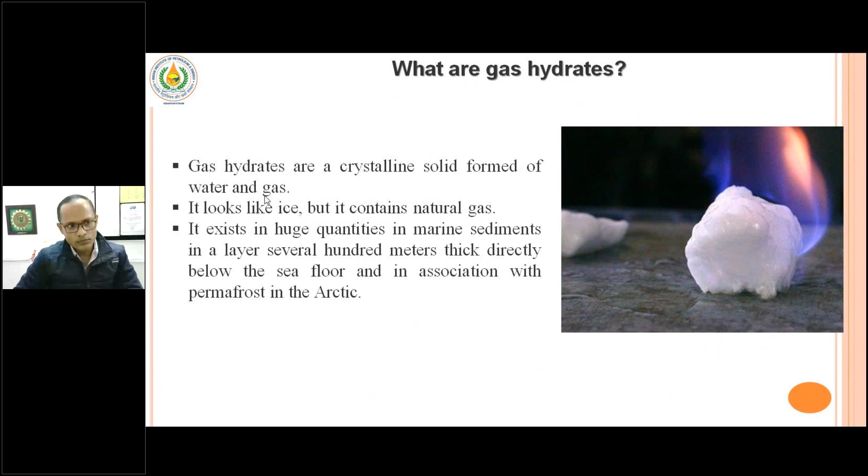We can find hydrates in reservoirs in most marine environments, as well as in permafrost reservoirs. However, almost 97% of reservoirs are in marine sediments, compared to 3% in the permafrost region.

When we keep the gas molecule and water under high pressure and low temperature conditions, the water molecules form a cage around the gas molecule. This cage is formed by hydrogen bonds. The water molecules are bonded with each other through hydrogen bonding, forming a cage around the gas molecule, which is entrapped inside this cavity. However, there is no bonding between the gas molecule and water molecule, because the gas molecule is free to rotate inside this cavity. Generally, most hydrocarbons that can form gas hydrates are light hydrocarbons like methane, ethane, propane, and carbon dioxide.

Since the gas is entrapped inside the cage or cavity, it depends on size also - the size cannot be too high, otherwise it cannot accommodate inside this cavity. That's why only certain gases can form hydrates: methane, ethane, propane, isobutane. Other gases like non-hydrocarbons, nitrogen, and H2S can also form hydrates.

As I told you, the water molecules form a cavity or cage around the gas molecule, and the gas molecule is entrapped inside this cavity. There are 5 types of cavities generally noticed in gas hydrate structures: dodecahedron, tetrakaidecahedron, hexakaidecahedron, irregular dodecahedron, and icosahedron.

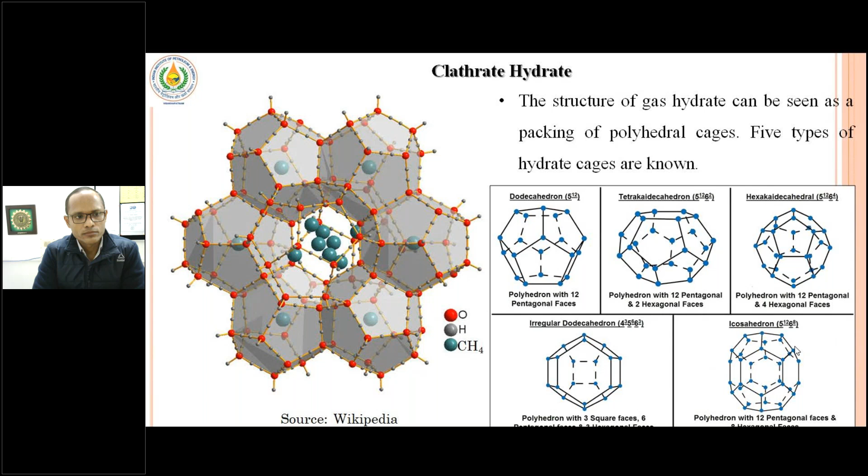So these 5 cavities form when you keep the gas molecule and water under favorable pressure and temperature - meaning high pressure and low temperature conditions. However, we won't get all these 5 types of cavities or structures in all types of hydrates.

Generally, we have 3 types of hydrates: cubic structure 1, cubic structure 2, and hexagonal structure. It depends on the size of the gas molecule it can entrap or accommodate. When the size of the gas molecule is 4.2 to 6 angstrom, that forms cubic structure 1, for example methane, ethane, carbon dioxide, hydrogen sulfide, etc.

Cubic structure 2 is formed by molecules having diameter less than 4.2, like nitrogen, or size in between 6 to 7, like propane or isobutane. It can form cubic structure 2, and hexagonal structure H forms when the size of the molecule is 7 to 9 angstrom. Above those sizes, the molecule cannot form any hydrate structure.

However, in the hexagonal structure, isopentane can form it because its size is between 7 to 8 angstrom, but it cannot form hydrate alone. For example, when we keep methane and water at high pressure and low temperature, methane will form methane hydrate. But isopentane, though it forms hexagonal structure, cannot form the hydrate alone. We have to keep some accompanying molecule, like methane, hydrogen sulfide, or nitrogen. That means when we keep isopentane with methane, only then will we get hexagonal structure formed by isopentane hydrate.

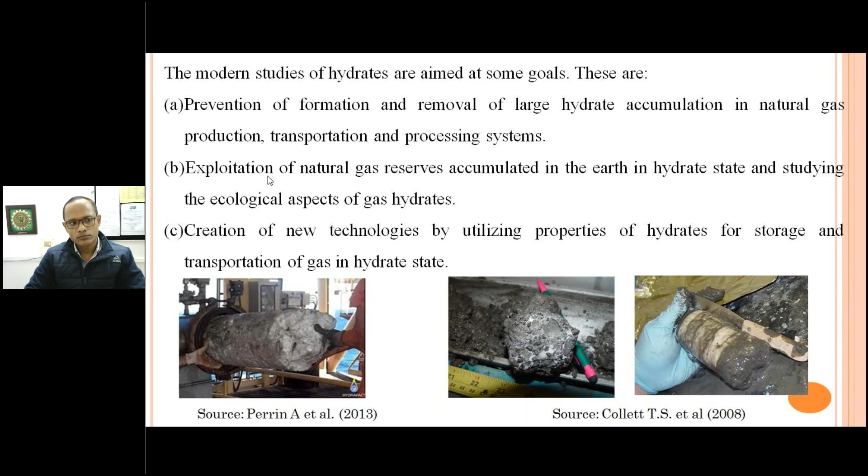In marine settings, generally in the continental slope zone, most of the hydrate exists, because for the existence of hydrate we require suitable pressure and temperature conditions. In this slope region, the pressure and temperature is ideal for the formation of hydrate. So most of the hydrate reserves exist in the marine environment in the continental margin. Similarly, in the permafrost region, we get hydrate below the ice layer.

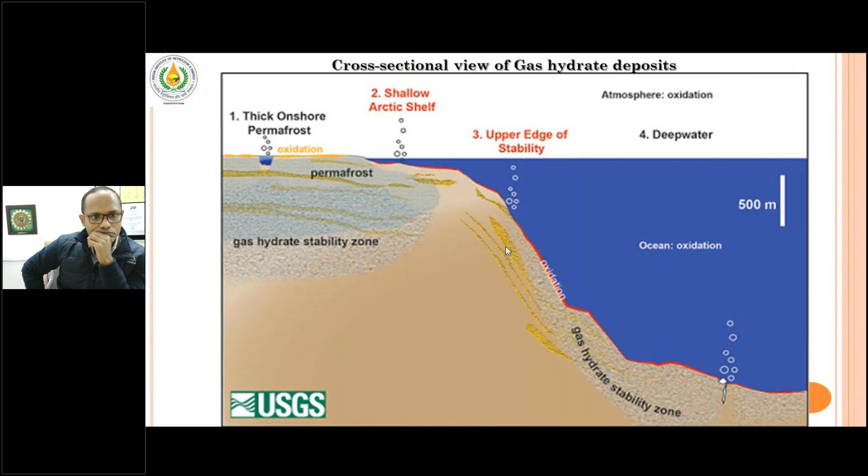So next, gas hydrate petroleum system. For any commercial production from any conventional reservoir, we have to find out the petroleum system, where components of a conventional petroleum system are source rock, migration pathways, sedimentary rock, cap rock, etc. If all the components of petroleum system are there in a conventional reservoir, then only we can plan for extraction of hydrocarbons from that reservoir.

Similarly, in the gas hydrate reservoir also, the gas hydrate petroleum system consists of gas hydrate stability condition, that means you have proper high pressure and low temperature condition in the reservoir. Then gas chemistry, the type of gas, because gas molecules above 9 angstrom cannot form any hydrate structure, and below 9 angstrom, depending on size, different types of hydrate form, and different types of hydrate are associated with different types of structure, meaning different types of water molecule arrangements.

So gas chemistry, that we have to determine, pore water salinity, because reservoir conditions like salinity, then capillary size of the porous media, also affect the pressure and temperature condition. So gas hydrate stability condition is one thing required for the gas hydrate petroleum system.

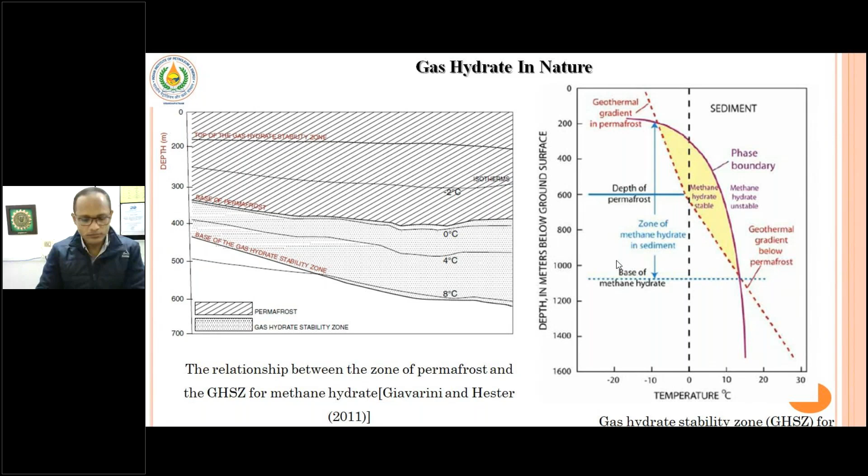When unconsolidated sand hydrate is formed inside unconsolidated formation, you get bulk deposits. Instead of inside porous media, this shallow deposit is mainly bulk type or layer type, because it's unconsolidated formation. When hydrate forms, it displaces the sand grains. As a result, you get this layer type or bulk deposit, or even in the outcrop you can see from the sea floor this type of hydrate outcrop.

So obviously from a commercial production point of view, there is no scope, or no technology available till now where we can produce this hydrate. So going back to the gas hydrate energy pyramid, this shallow gas hydrate deposit is at the bottom of the pyramid. That means volume is too high, but there is no technology, or we cannot produce those gas efficiently or economically.

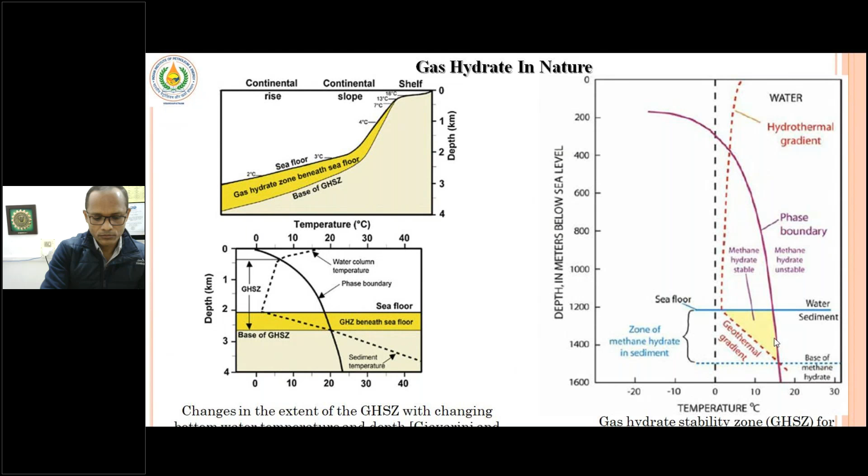Now deeper gas deposit - but don't get confused when I say deeper. It cannot go below this baseline, because below this, hydrate cannot exist. When I'm saying deeper, I mean this region, around this region. So in deeper hydrates, we'll have pore filling types, load bearing types, or cementing type.

In pore filling type, hydrate nucleates here, then grows in the pore space, and fills up the space. Mostly this type of reservoir is the best candidate for production of gas from hydrate reservoirs, because we require a stable structure also. However, since hydrate is growing inside this pore space, the saturation should not be 100%. As I've told you earlier, we require some effective permeability for movement of the other phase also.

Then in load bearing type, what happens? Hydrate initially grows inside the pore space like this one. Then it grows in volume and displaces the sand grains. When it displaces the sand grains, it becomes part of the structure also, carrying the overburden of this formation. So it becomes load bearing hydrate - it's called load bearing hydrate structure. Then hydrate can form in between two grain particles and cement them.

Out of these, as I have told you, pore filling hydrates are the most sought after for commercial production from a hydrate reservoir.

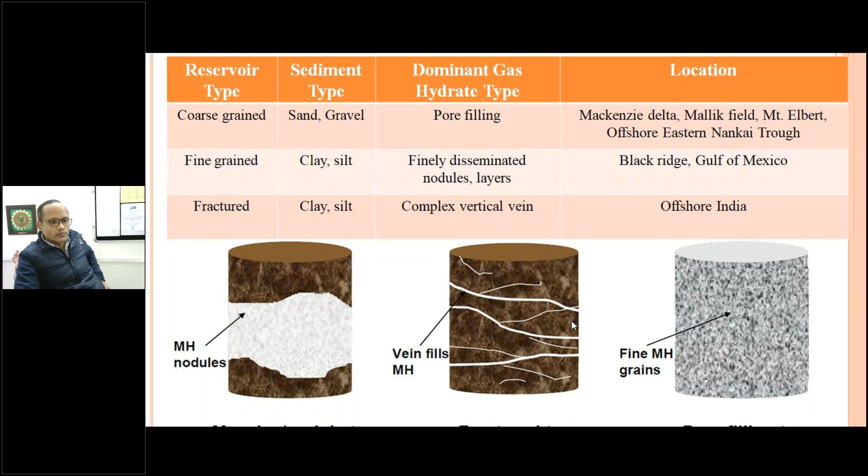Pore filling reservoir can be differentiated into 4 categories of hydrate reservoir: class 1, class 2, class 3, class 4. Class 1 has sediments, caprock, an impermeable layer, below which is the hydrate reservoir, then below that is the gas layer in water. The gas in water indicates this zone is outside the hydrate stability zone, meaning pressure and temperature here are not suitable to form hydrates. That's why we have free water and free gas here. This is your class 1 reservoir.

This is the best reservoir to produce, because one production method is to depressurize, meaning we decrease the pressure of the reservoir. In this class 1 reservoir, when we produce the free gas from this zone, automatically the pressure decreases. So by producing the free gas, we decrease pressure in the reservoir, and ultimately we can dissociate the gas hydrate from this zone also, and produce the gas trapped here. So this is one of the best gas hydrate reservoirs from a commercial perspective.

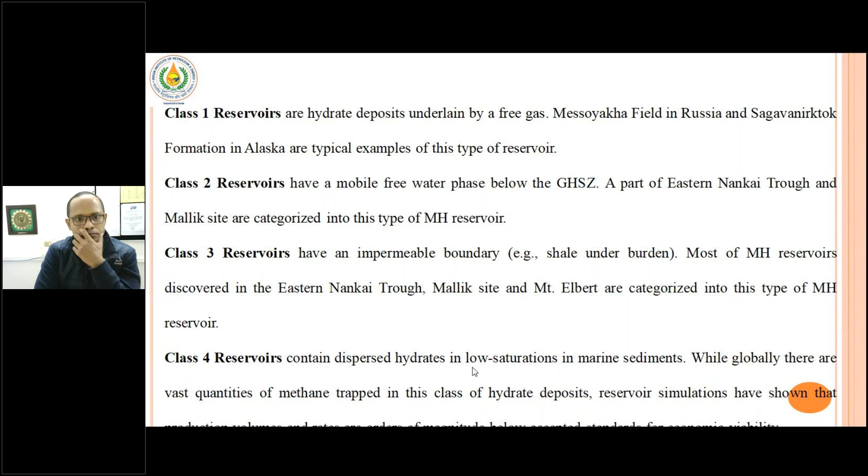Now for production of hydrate - in a conventional reservoir, for production we have to drill a well, then establish a drawdown, and because of the drawdown the hydrocarbon moves towards the wellbore and we can produce it. I'm talking about the simplest method, not going into complexities.

But in gas hydrate production, we first have to release the gas from the hydrate structure, because in the hydrate structure, gas is inside a water cage. That means we first have to dissociate it, take out the gas molecule from the water structure, only then can we produce it. So for production from the water cage, we have to destabilize the hydrate. So how do we destabilize the hydrate? There are a few methods.

For example, this is the phase diagram, the gas hydrate phase diagram. This phase diagram indicates the region where the pressure and temperature conditions are such that hydrate is stable - meaning the gas molecule within the water cage formed by water molecules is stable in this region of the phase diagram.

Below this phase diagram is the unstable region. If gas hydrate reservoir conditions are above this curve, that means they are stable. I have to bring this pressure and temperature condition from here to below this hydrate phase equilibrium curve. This can be done by decreasing pressure, called depressurization, or by increasing temperature, called the thermal method, and also by using inhibitors, which I will discuss later. So we have to know this phase equilibrium diagram for each reservoir, so that we can plan how much pressure we have to drop or how much temperature we have to increase. This phase equilibrium curve we have to decide.

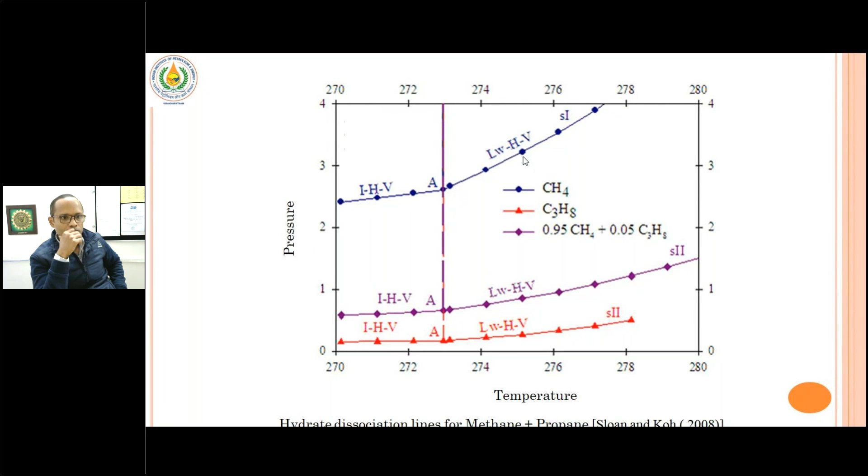So when we think about depressurization, if methane hydrate is there, we can depressurize from the initial condition at this region to here only. But when propane is there, meaning structure 2 is present with thermogenic gas origin, we have to depressurize below this curve to dissociate the hydrate in the reservoir.

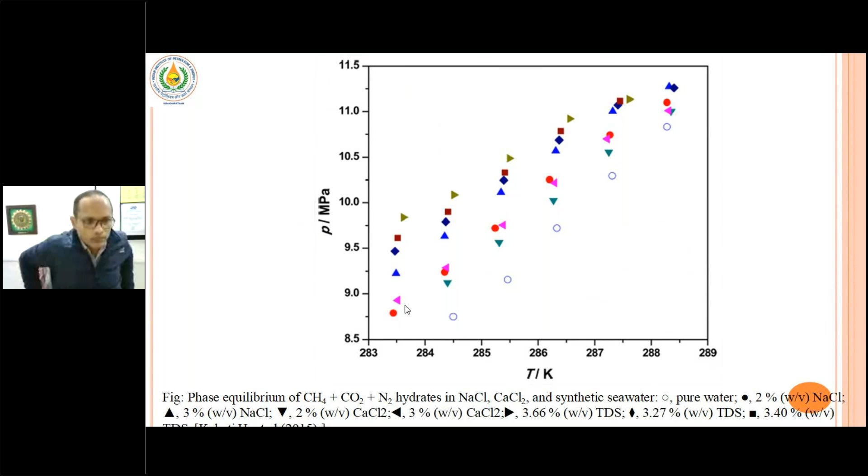Salinity also affects this, because pore space always contains water, and that water may have various salinity. Based on the salinity value, this phase equilibrium curve changes. This is for pure water. When we add 2% sodium chloride, this curve moves upward. When we increase the salt content, it moves further toward the high pressure zone. That means compared to fresh water, when salt is present, hydrate will form at a higher pressure condition, and most pore fluids contain various amounts of solutes. Based on that, we have to determine this phase diagram, so that we can bring the reservoir condition outside it, below this phase diagram.

The grain size also affects this hydrate phase equilibrium diagram, the pressure and temperature conditions. This is the bulk phase, meaning without any porous media. When pore size decreases, the smallest porous media forms at high pressure. So when we have small grains, like clay or silt, hydrate will form at high pressure, and when we have sand, coarser grain, then it forms at lower pressure compared to silt and shale. So the size of the grain particles also affects the hydrate pressure and temperature conditions. Other components like minerals may also affect pressure and temperature conditions.

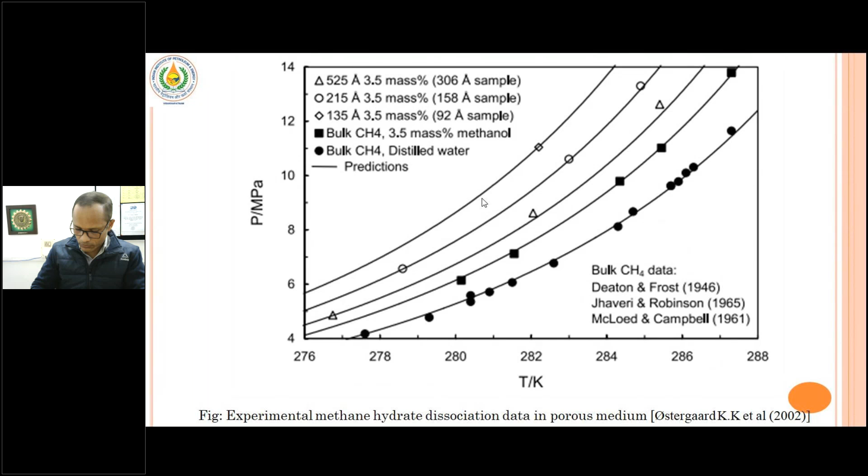However, these are the three main conditions: gas composition, salinity, and grain size, which affect the pressure and temperature conditions phase diagram. So before production from any reservoir, we have to find out this phase diagram for each and every reservoir before planning for any type of depressurization, thermal, or any other production technique.

So we have four methods of production currently: depressurization, thermal, inhibitors, and methane exchange.

As I have told you, depressurization means we have to reduce the pressure of the reservoir so that it goes below the phase or equilibrium pressure. This can be done by removing the free gas in class 1 reservoirs, because below the hydrate in class 1 reservoirs, there is free gas present. By removing that free gas, we can decrease the pressure. In class 2, we can decrease it by removing the water from the underlying layer below the hydrate.

We can remove that water from the layer and decrease the pressure in that reservoir, or we can install a pump, like an ESP, in class 3, where the hydrate layer is entrapped between two impermeable layers. When we decrease the pressure, the hydrate will dissociate, and when it dissociates it releases gas molecules, which we can then produce. However, along with the gas, water will also come, and when hydrate dissociates, permeability increases.

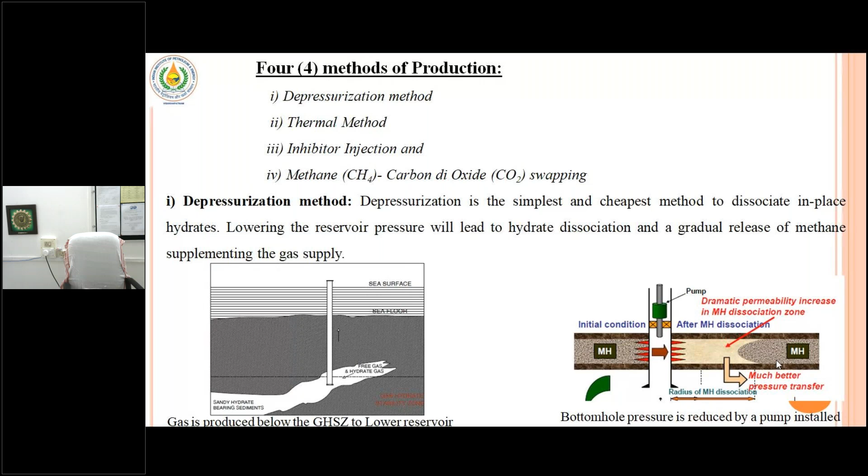In this production test, the depressurization method was already used in the Mallik production test in April, and I will discuss this later.

Next is the thermal method. Thermal method is simple, like thermal stimulation or thermal flooding. Thermal stimulation includes hot water circulation, where you inject hot water into the wellbore, which is taken up by the formation. As a result, the hydrate dissociates, temperature increases, and when temperature increases, the hydrate stability zone moves outside the stable pressure and temperature conditions, causing the hydrate to dissociate.

However, in hot water circulation method, you have to remember one thing: you have to inject water at a pressure greater than the initial pressure. When hydrate is there, the pressure in the reservoir is obviously high, because hydrate forms preferably in high pressure and low temperature zones. So the reservoir where you get hydrate is generally a high pressure reservoir, and your injection pressure should be greater than the initial reservoir pressure. Greater injection pressure means you require high pressure rating equipment at the surface. So you have to take care of that.

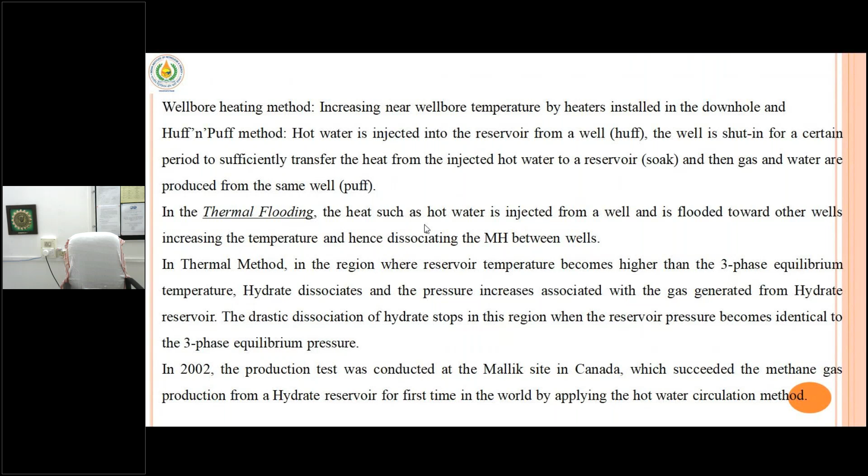Similarly, thermal flooding. What this means is you are injecting hot water here, and producing from another well at a distance, in a separate well. But again, the feasibility of this project depends upon the effective permeability, because water has to move through the porous media.

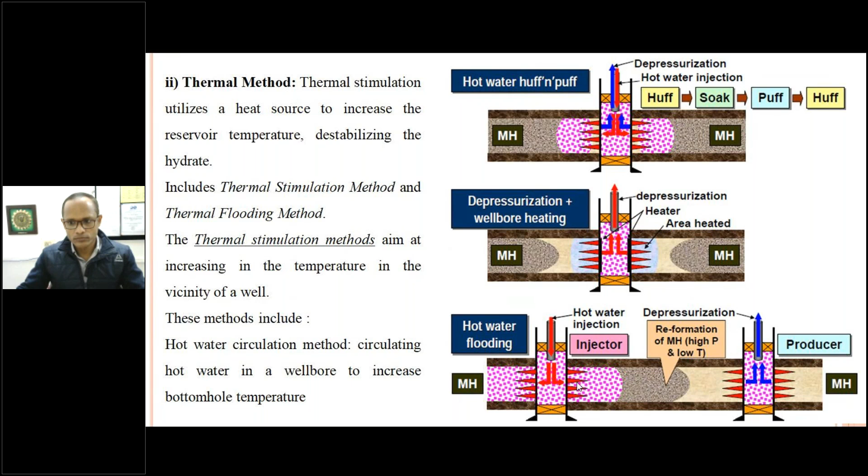When water is moving, suppose you are injecting hot water and it is moving here. When water reaches this point, that is the dissociation zone, where hydrate dissociates because of the endothermic reaction, making this a cooler region. Now when water reaches further, hydrate may reform here because the endothermic reaction makes the temperature too cool, and since you are already injecting at a pressure, there might be reformation of hydrate in this zone. Once hydrate reforms, it will block the injection flooding. So these difficulties are there in this type of thermal project. However, it is one of the least efficient methods of producing.

Another method is inhibitor injection. In inhibitor injection, you can see here the phase equilibrium diagram. The initial pressure and temperature condition is above this phase equilibrium diagram. So in depressurization and thermal flooding, we bring this initial pressure condition outside or below this curve by reducing pressure.

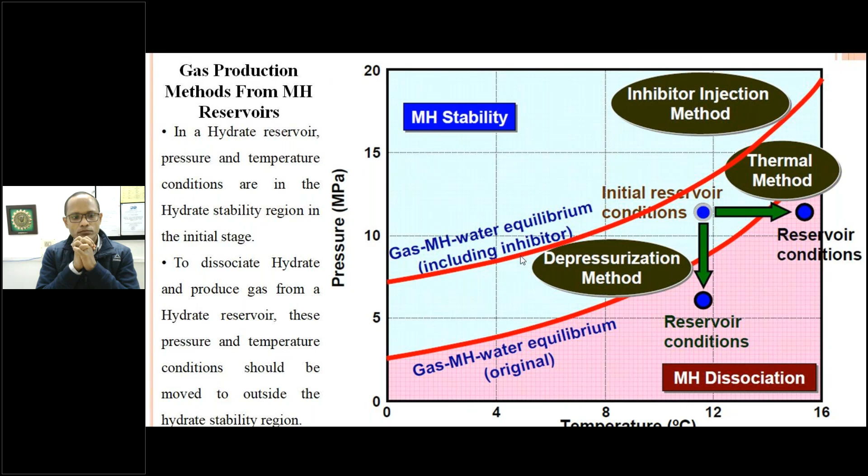We can achieve the same objective by moving this phase equilibrium curve in the upward direction, so that the initial condition of the hydrate reservoir automatically comes below this phase equilibrium curve. This can be achieved by injection of thermodynamic inhibitors. So when we inject thermodynamic inhibitors, it shifts the phase equilibrium curve towards the high pressure region, and the initial pressure-temperature condition automatically comes outside the hydrate stable region, and when it is outside the hydrate stable region, it starts dissociating.

However, when we talk about inhibitors, we have to remember there are three types. One is thermodynamic inhibitors, which affect the pressure and temperature condition. The other is low dose hydrate inhibitors, where we have kinetic inhibitors and anti-agglomerants. These kinetic inhibitors and anti-agglomerants cannot affect the pressure and temperature condition. Kinetic inhibitors only affect the induction time, and anti-agglomerants prevent the agglomeration of hydrate particles only.

This kinetic inhibitor affects the induction time, meaning when we keep water and gas at hydrate forming temperature, it won't form hydrate immediately; it will take some time. Only after some time will they form hydrate, even though the water and gas are inside the hydrate stable zone. This required time is called induction time. So kinetic inhibitor increases this induction time only, but does not affect the pressure-temperature condition.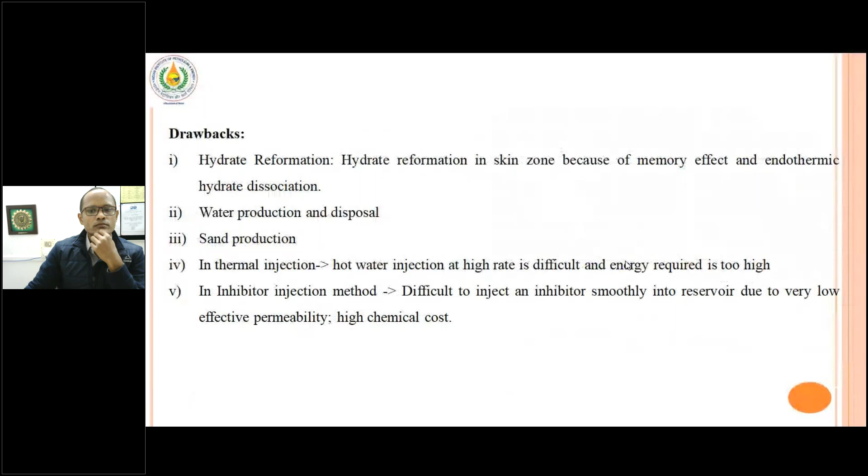So what happens when you inject carbon dioxide into the methane hydrate reservoir? It decreases the methane hydrate stability condition. It removes the stability condition, so the condition comes below the methane hydrate curve. As a result, methane hydrate will dissociate.

Now you can see that both methane and carbon dioxide form structure 1 hydrate. Remember, structure 1 hydrate contains 2 cavities of dodecahedron and 6 cavities of tetrakaidecahedron, while structure 2 has 16 cavities of dodecahedron and 8 cavities of the other type. Both methane and carbon dioxide form structure 1, meaning it has 2 cavities of dodecahedron and 6 cavities of the other type.

This can be found from the ratio of gas molecule diameter to host cavity diameter. As I've told you, only a few molecules can form hydrate, and this depends on the gas molecule diameter divided by the cavity diameter, which should be between 0.76 and 1. If it's less than 0.76, the gas molecule is too small to stabilize the hydrate structure - it will dissociate and cannot form a stable structure. If the ratio is greater than 1, the gas molecule is too large and cannot be accommodated. So 0.76 to 1 is the criteria for a stable gas hydrate structure.

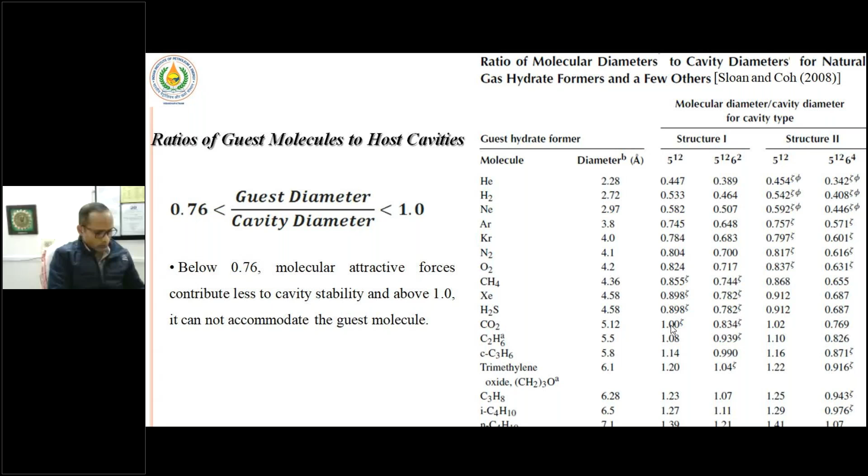Now, in this case, both methane and carbon dioxide form structure 1. So when you inject carbon dioxide into the reservoir, it will destabilize the methane structure. When it destabilizes the methane structure, methane will come out from the water molecule cages, and carbon dioxide will enter that cavity.

However, from this chart of gas molecule to cavity fit, you can notice that carbon dioxide cannot enter the smaller cavity - it can only enter the larger cavity. So when you inject carbon dioxide into a methane reservoir, the methane stability condition is disturbed. As a result, methane comes out from the large cavity and carbon dioxide enters it, while methane remains in the small cavity. You can then produce the methane that was stored in those large cavities. However, since the ratio of small cavity to large cavity in structure 1 is 2:6, meaning 1:3 overall, the efficiency of this process can theoretically be around 66%.

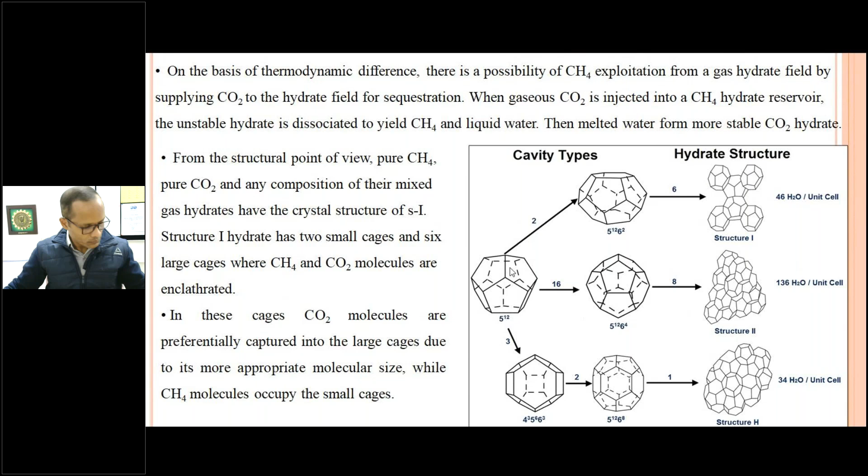However, the efficiency of this process can be improved by addition of nitrogen also. As I told you, injection of carbon dioxide can remove methane molecules from the large cavity only, since carbon dioxide cannot enter the small cavity, so the efficiency is maximum 66%. But when you use nitrogen along with carbon dioxide, since the size of nitrogen is smaller, it can enter the small dodecahedron cavity also, and remove the methane inside from that cavity too. As a result, by injecting carbon dioxide and nitrogen together, we can get better efficiency compared to a single gas molecule.

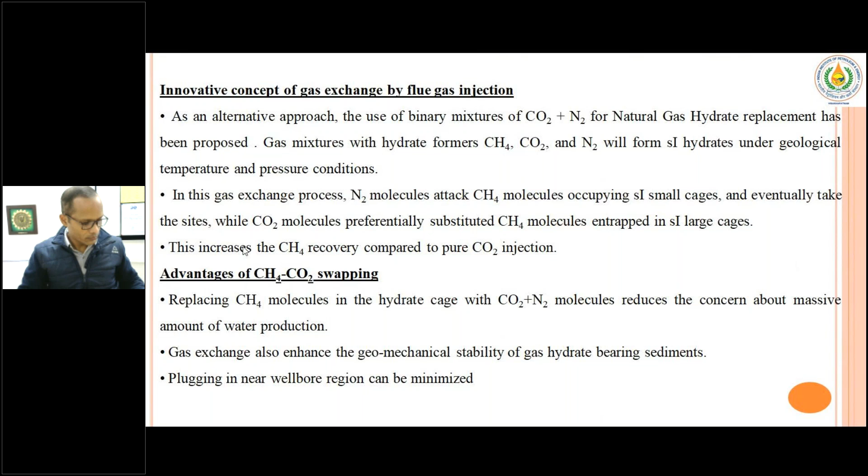Also, this carbon dioxide and nitrogen mixture is nothing but flue gas released by industries into the atmosphere. So if we can inject this gas into hydrate formation, we can produce gas the same way, while also reducing the emission of flue gas into our environment.

So one advantage is that water production will reduce, because since carbon dioxide and nitrogen are also forming hydrate, water gets involved in the hydrate formation, resulting in less free water.

Regarding geomechanical stability, in depressurization or other methods, since you are dissociating the hydrate, if it is load-bearing, this may cause wellbore collapse, or even structural collapse in case of offshore. But here, since you are not completely dissociating the hydrate, the mechanical stability of the hydrate-bearing sediment is retained. Also, plugging near the wellbore can be minimized, because the heat released during carbon dioxide hydrate formation is being utilized by the dissociation process, so there is no colder region in the reservoir, and plugging near the wellbore can be avoided.

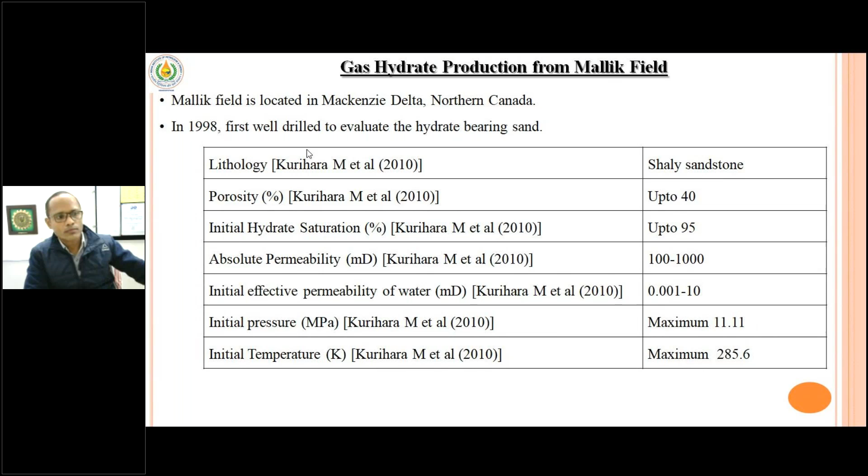So first production in Mallik field started in 2002. The method of production was thermal stimulation. They produced for 124 hours. Total gas production was 462 meter cube. Here they noticed too high sand problem as well as water problem, so the efficiency was not quite that good.

However, because of the sand problem, they could not get continuous pumping. They had to stop the pumping operation frequently. As a result, they got less production, and the pumping problem is because of sand deposited inside the pump. As a result, they had to replace and reinstall it, so they could not get continuous production.

So total production was around 830 meter cube. Water production was 20.

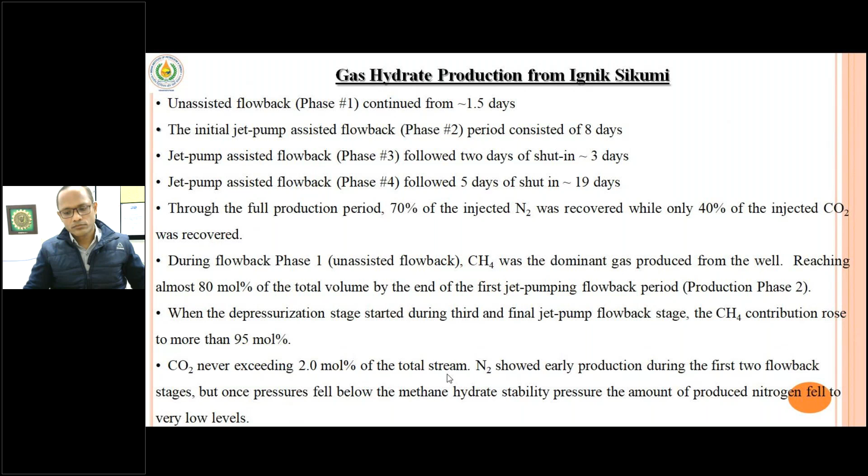When depressurization stage is up to this phase, they have almost recovered 95% of methane, and the rest 5% is injected nitrogen and carbon dioxide. Also notice that the carbon dioxide never exceeds 2%, which is good. That means they have successfully sequestered the carbon dioxide in the formation.

Then this gas hydrate production from Nankai Trough in Japan, the first offshore production done in 2013. Here hydrate saturation is up to 80%. The method of production obtained is depressurization. During 6 days of production, they decreased the pressure in a stepwise manner: first 13 down to approximately 5, then maintained that for 4 days, then again decreased to 4.5.

That means, whatever they learned from the Mallik field, they realized that to reduce the sand problem to some extent, pressure should be decreased in a stepwise manner. That's why they implemented that technique here, and as a result they are getting higher production compared to the Mallik field. However, water production is also too high, and the method of sand control was gravel packing.

Then again, in that same Nankai field in 2017, they did 2 tests: one for 12 days, drawdown was around 7.5, and 41,000 methane gas produced here. Another well at around the same time in 2017 for 24 days produced this much methane gas.

However, here drawdown was less compared to the other well, because they could not increase the drawdown due to higher water production problems. Since they noticed this higher water production problem in the first test done in 2013, in this case they have isolated the lower hydrate saturation zone.

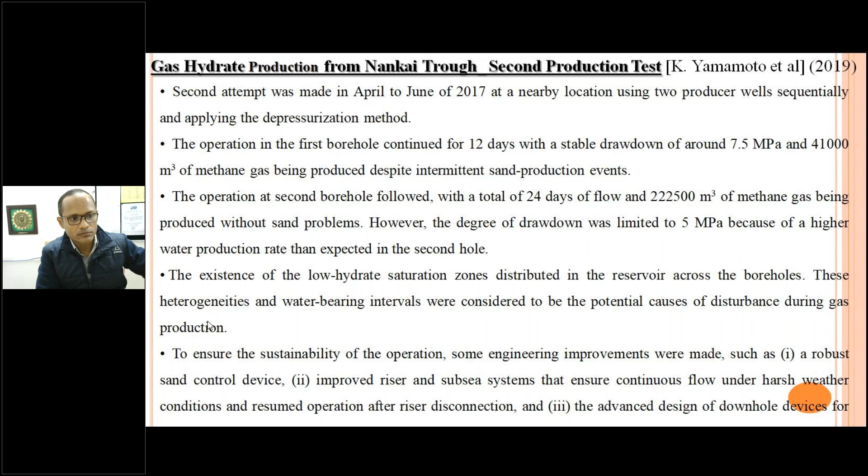Then in the South China Sea, first production was done in 2017. This is the longest duration of production, 60 days, producing this much gas. Method: depressurization, sand control, slow depressurization screen.

Here, instead of high depressurization, they did it by slow depressurization. As a result, they reported less sand.

They did it again in 2020, recently concluded in April, for 30 days of production by depressurization. Comparing production, here it was around 3.9, here it is around 8.6, higher production, because they used a horizontal well, and exploiting the horizontal well increases the surface area of the wellbore. That's why they increased production.

For sand control also, they used composite 3-layer control technology, which consists of coarse fine grain gravel packing and high precision pre-pack screen. But though they reported getting less sand this time, there is still lots of scope for improvement.

One thing to notice here is that the horizontal well can be used for increasing production because it increases the surface area. That's the basic idea.

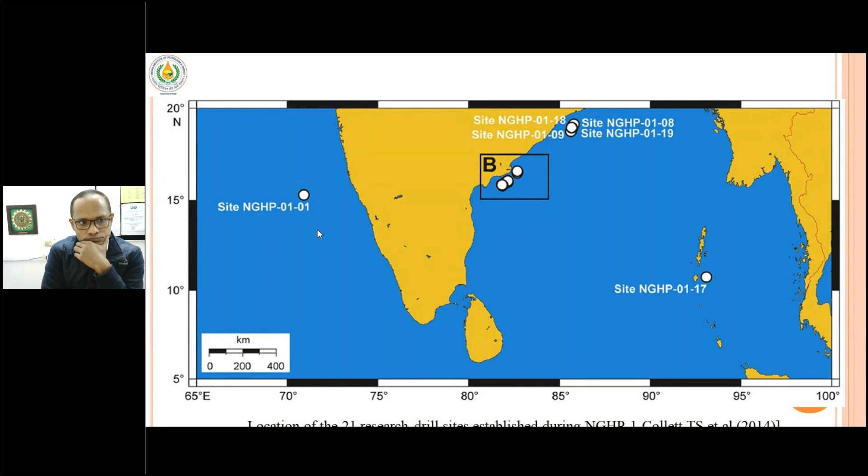In Mahanadi, Krishna Godavari basin, and Andaman Sea, one of the thickest gas hydrate accumulations was discovered in Krishna Godavari basin, and one of the deepest hydrates, 600 meters below the sea floor, was discovered in Andaman. Most of the hydrate discovered is in fracture reservoirs, as already mentioned, and most of it formed by microbial process, that is, biogenic origin, meaning methane gas, structure 1 hydrate.

Then in 2015, India completed the second gas hydrate program, National Gas Hydrate Program 2. The aim was sand dominated reservoirs, meaning pore filling reservoirs having this coarser grain structure, reasonably compacted sediment, with occurrence of free gas below. That means looking for structure class 1 hydrate, where free gas is found below it.

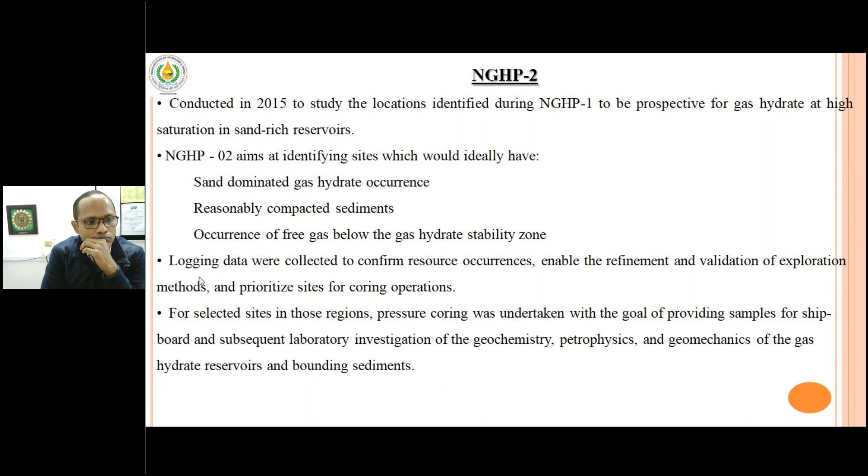So they performed logging, coring, and pressure coring, wireline coring, and based on this they confirmed in Krishna Godavari, regions B and C, the sand dominated reservoir. Two areas in Krishna Godavari, region B around the Visakhapatnam area, and region C, where they determined a fine sand rich system.

That means coarser grain sand rich systems, an ideal candidate for future gas production, with hydrate saturation ranges from 50% to 100%. Obviously we don't want 100%, but we require more than 50% reservoir hydrate saturation.

In the third step, India is planning a third National Gas Hydrate Program 3, where they are planning to drill at least one pilot well in one of these areas, B or C.

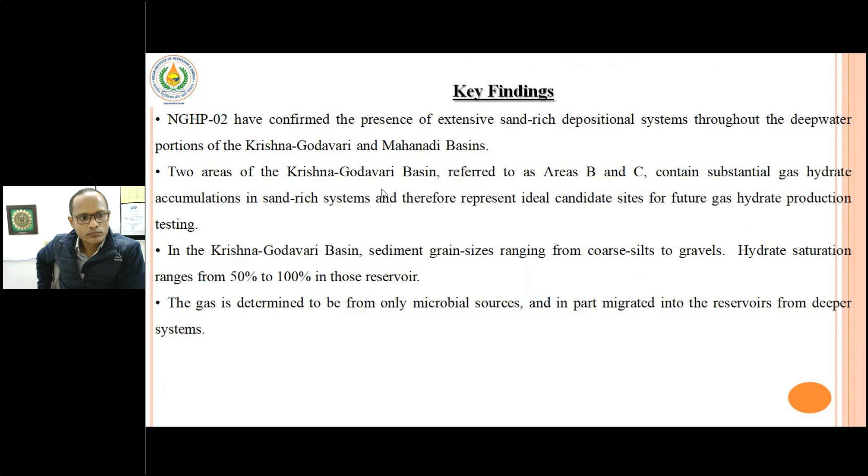Lastly, the production of gas hydrate is associated with environmental and geomechanical issues also. The environmental impact is because of methane gas released into the atmosphere, which would be a very big problem, because methane is 21 times more potent a greenhouse gas compared to carbon dioxide. Combustion of methane is safe, but release of raw methane into the atmosphere is very hazardous because it is a more potent greenhouse gas. So if, because of production, methane is released, that will be a huge problem.

However, there is no scientific basis or observation around the world that this release happens, that there is continuous release of methane into the environment because of this production.

Also, there is mechanical hazard, because if we produce from some load bearing sediment, there may be a disaster of formation collapse. So wellbore stability also has to be looked at. These environmental and geomechanical issues have to be examined before going for full scale commercial production.

So this is the summary. Natural gas hydrate is considered widely as an alternative form of energy because of tremendous reserves. Several countries have already started pilot scale studies. However, low production, hydrate regeneration, and sand problems are still to be solved before going for commercialization.

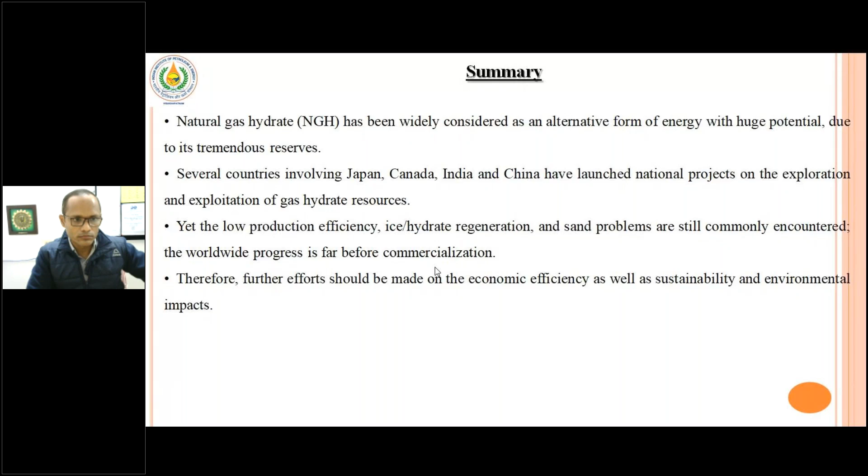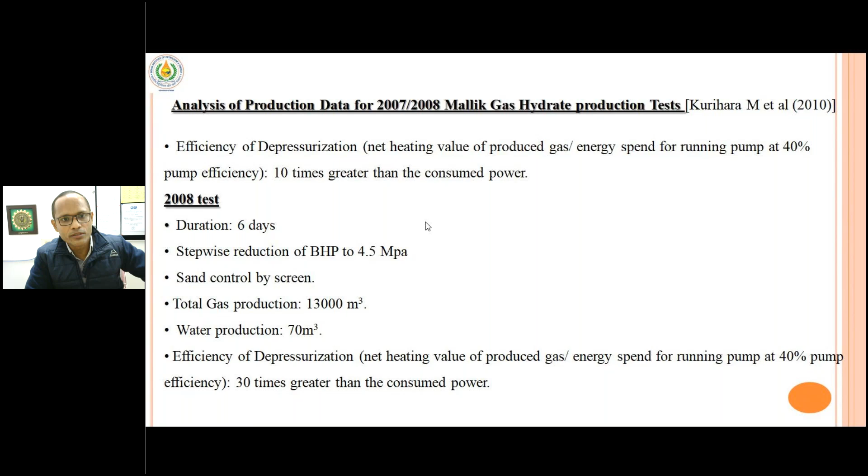The main challenges faced during this pilot study: one is high water production rate. High water production means, when we go for commercial production, we cannot go for high water production because we have to dispose the water. And if we are thinking about injecting water, we have to remove the salt, because we cannot inject high saline water into the reservoir. That's the first thing.

Second problem is the sand problem. We have to solve this because whether going by depressurization or any method, even in the carbon dioxide sweeping method, when mechanical equipment is there, we cannot afford high sand content, because when sand is high, it will erode the equipment. So sand control we have to bring to our level so that we can go for commercial production.

Then another challenge faced is effective permeability. Initial effective permeability means when we go for hydrate production, we obviously look for higher hydrate saturation, but higher hydrate saturation decreases the initial effective permeability for gas or water. When initial effective permeability is less, pressure response travel in the reservoir is less. So that's one problem they are getting.

And also, for getting higher effective permeability, we cannot choose a lesser hydrate saturation reservoir, because lesser hydrate saturation means again we get less amount of gas. So that is one initial problem. These are a few problems, sir, the main problems we have to solve before going for commercial production.